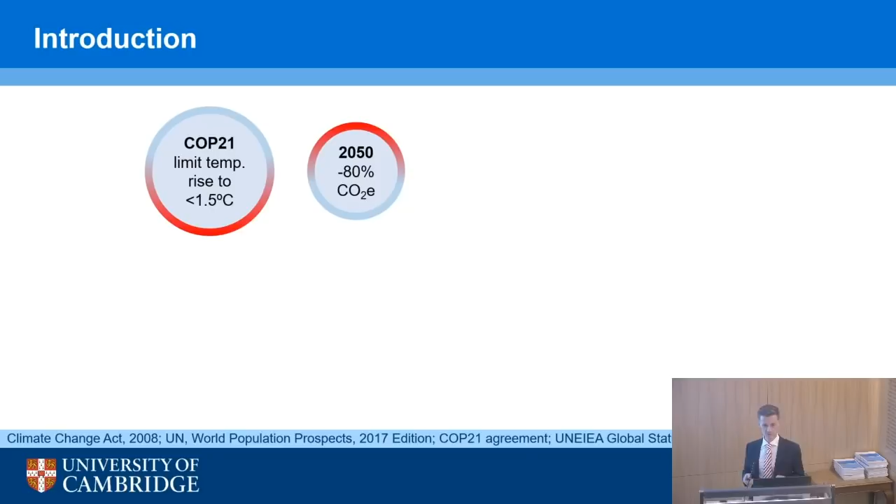So the context of the project then really goes right back to climate change and looking at things like COP21. COP21 sets out this ambition for a 1.5 degrees centigrade limit on temperature rise. And in the UK, that manifests itself as an 80% reduction in CO2 emissions. So that's just for the UK. Obviously important around the world. Global population is going to be 9, 10, 11 billion people by 2050. Most of those people, 68%, will be living in urban areas, so we have hugely increasing urbanization. And that's really important for the work that we do as structural engineers, because about 40% of energy-related CO2 emissions come from buildings and from construction.

So it's important environmentally. The sector is also very important for the economy. So 10 trillion, that number is. $10 trillion is the global construction sector, roughly. So it's about 13% of global GDP. And in the UK, the figures are slightly different. So it's 8% of UK GDP, roughly speaking, 10% of jobs in the construction sector. So it's really an important part of our economy, important part of our environment, and the things that we do underpin other sectors which make the workers have places to go, modes of transport, all of those things are really fundamental.

So despite that importance, when we talk about the economics of the industry, you might not have seen this slide before, but you'll have seen something like it. This is productivity, value added per worker. In the period from 1995 to 2011, data from 7 countries there, construction productivity flatlining, while manufacturing nearly doubles, so 1.7 times. So we have a huge challenge there in dealing with that productivity, whilst also satisfying the economic and the environmental constraints.

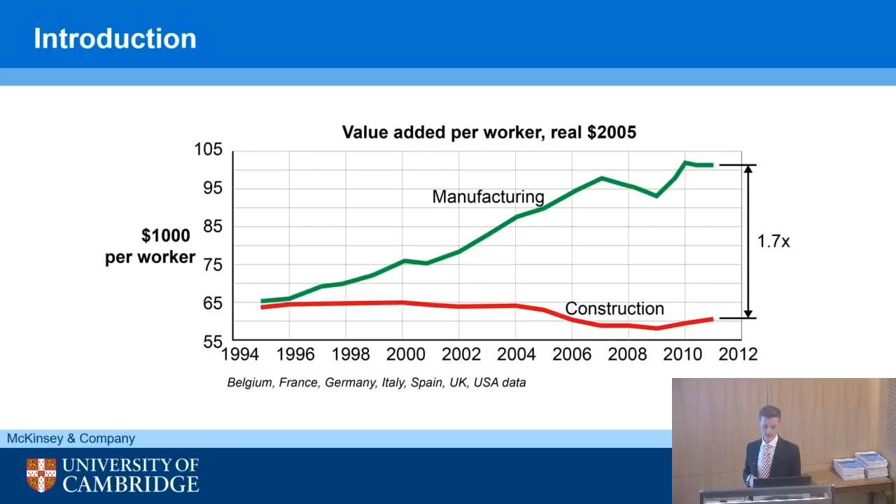In that same period, if we were to look at energy use in the buildings that we create, the energy demand balance has really changed. So there's been huge changes. So maybe 30 years ago, if you were to analyze whole life energy use, a significant proportion of it would have come from operational energy. So the lighting, the heating, running the computers and so on.

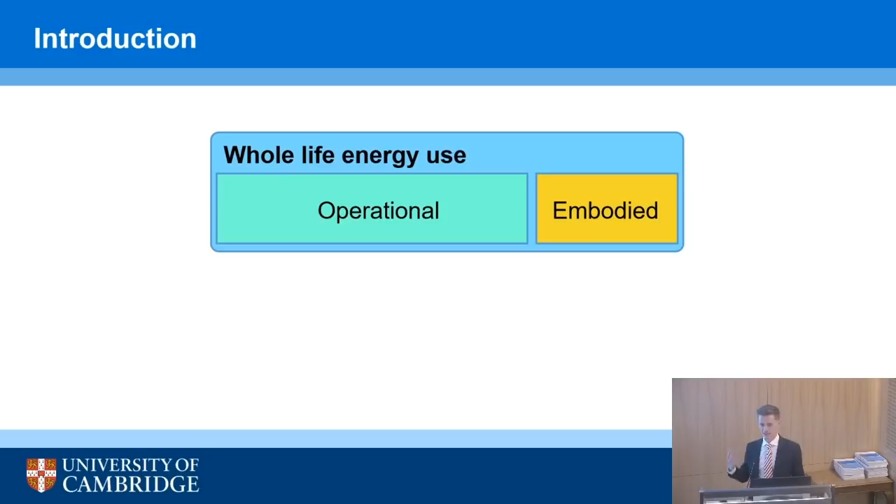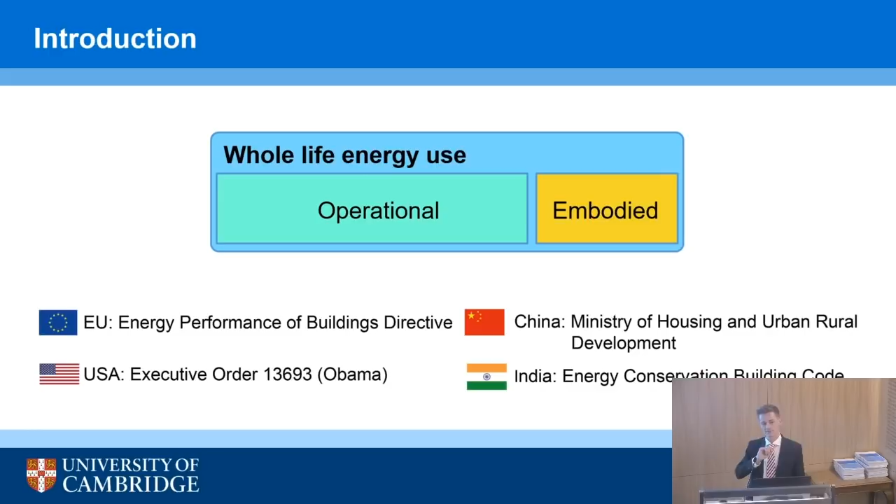We've decarbonized the energy supply, we've got better insulation, we've got better energy efficiency in appliances, and we've had a huge number of directives and requirements in energy performance, such that the pendulum, if you like, has kind of swung the other way, and you can now have buildings with very, very low operational energy, almost zero. Not quite zero, but almost zero. So it's swung the other way in a well-designed structure, which makes the embodied energy as a percentage the more important thing to consider.

Okay, so now we have to tackle embodied energy with the same vigor as we tackled the operational energy. This is an example from 2010, a 60-year life cycle of a structure in London, where 70% of that whole life energy comes from embodied energy. And it's the embodied energy that structural engineers get their hands on - the materials, the stuff that we have a real big impact on.

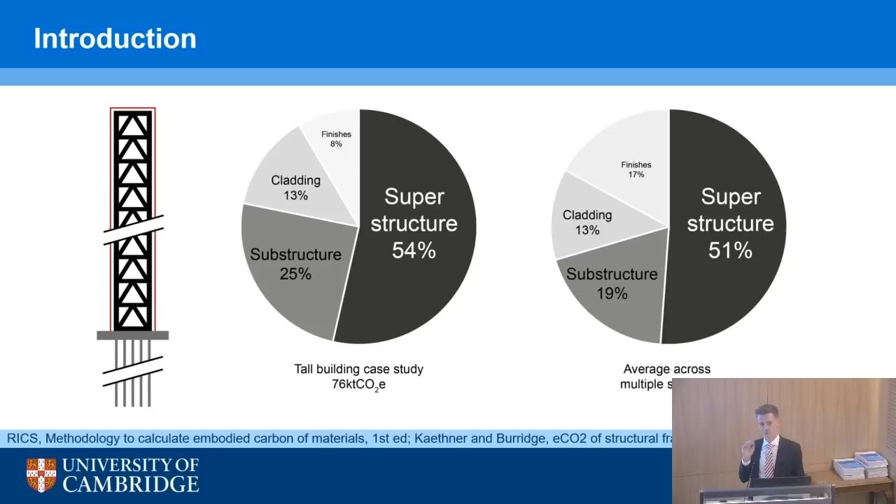As an example, this is a case study in London, a tall building - 79% of the initial embodied energy comes from the substructure and superstructure. Another study from Kaethner and Burridge found 70% of the initial embodied energy coming from the substructure and superstructure. So a large portion is in your gift as structural engineers.

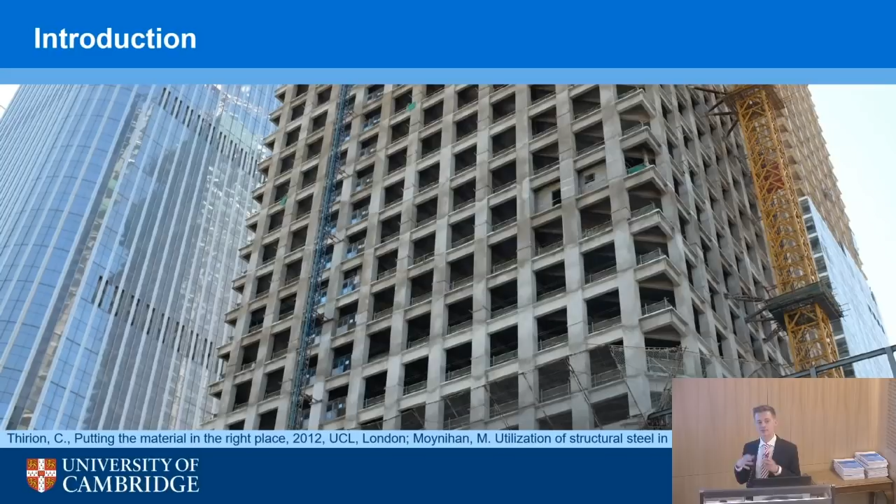So far, perhaps no problem. We need bridges, roads, infrastructure, offices, places to go, places to work - that's part of modern life. We want these tall buildings, and they require concrete or steel to put them up. One problem comes when we look at these structures and ask: how effectively, how efficiently are we utilizing the materials, how are we using this embodied energy? It has a big impact on the environment - are we actually making good use of it?

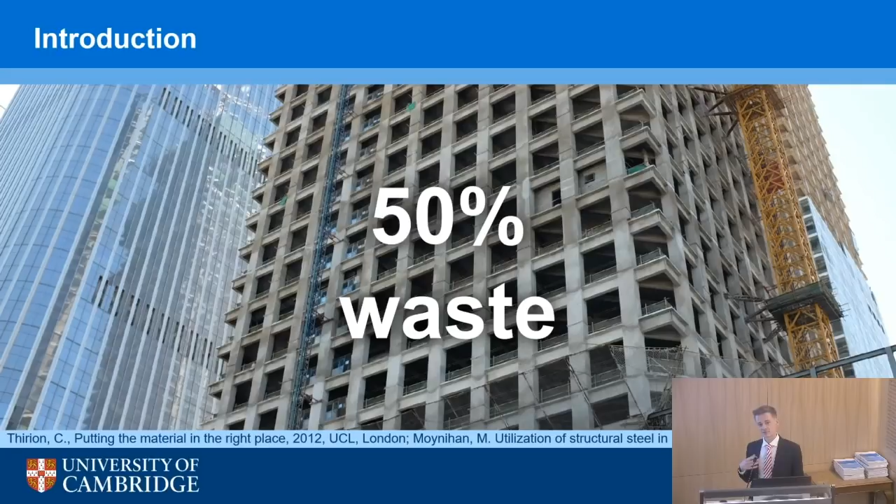You might find, from two studies, that 50% of that material is, in inverted commas, wasted. And that's a real concern.

It's a particularly big concern when we look at this report from the United Nations, where we expect to build, in the next 40 years, 230 billion square meters of new floor space. So huge amounts of construction - that won't be happening in the UK, that will be happening in other countries. That's like building Paris every week for the next 40 years. So this is the kind of scale of the challenge.

All of those data and statistics add up as a combination which you could either say is a perfect storm or a huge opportunity to do something really amazing with the materials that we have. And a final point about other countries: of that 230 billion square meters, 100 billion square meters will be built in countries without any mandatory building energy codes. So for us and for the institution, there's an opportunity to show leadership in how this could be done to the best effect.

Which leads us to this project: Minimising Energy in Construction, funded by the EPSRC, to whom we're enormously grateful. It's a relatively short project, only 2 years, intended to be a feasibility study. That's the whole point - it's the beginnings of, hopefully, millions of pounds, not hundreds of thousands. Our long-term vision is to make this idea of whole-life energy consumption using minimum material resource the guiding principle for design. That's our long-term vision, maybe several decades away.

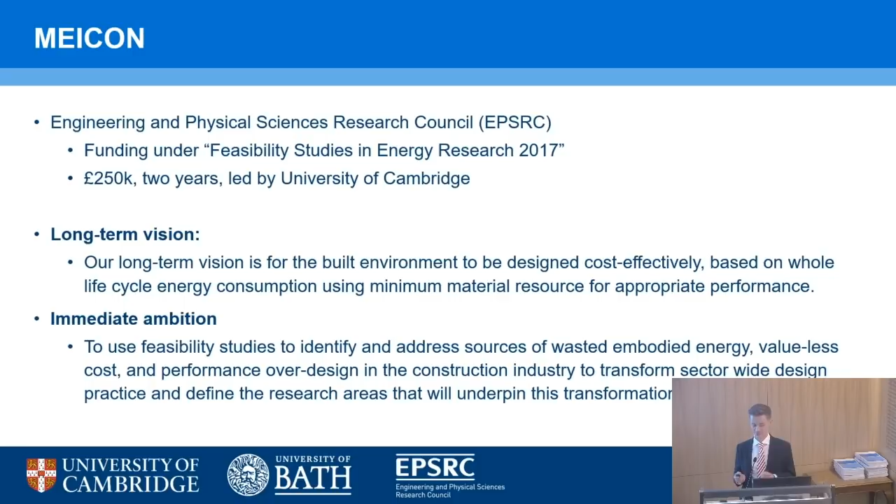The immediate ambition in the project is to use feasibility studies to identify and address these sources of what we're calling wasted embodied energy and value-less cost. That really fits in with two key documents. The first, from 2013, is Construction 2025, with 4 main targets, 2 of which are important for this presentation: to reduce costs by 33% and to reduce carbon dioxide emissions by 50% by 2025. The other 2 relate to speed of delivery and the trade gap.

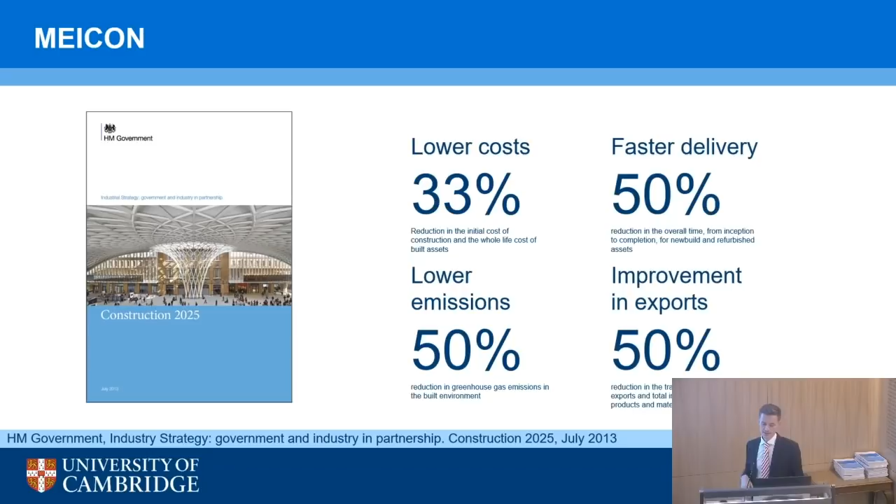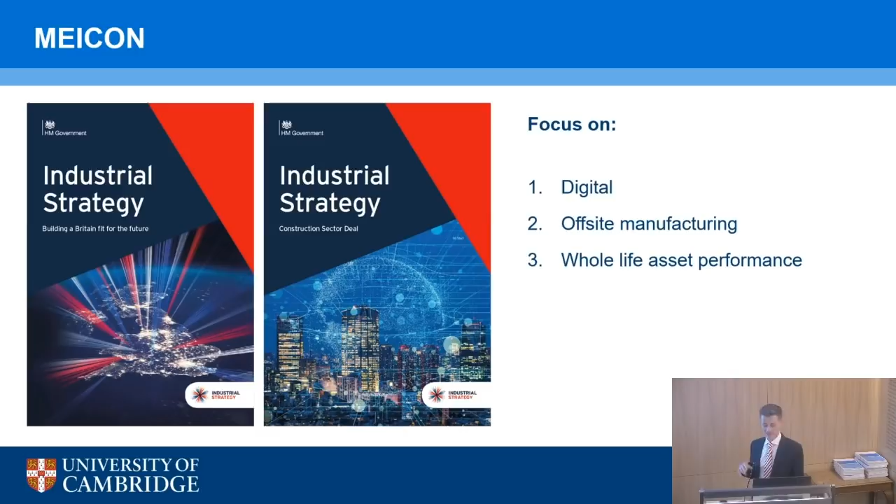That was 2013. Much more recently, we've had the sector deal for construction coming out of the industrial strategy, which talks about transforming construction for all the reasons I've just outlined, focusing on digital, off-site, and whole-life performance. These are really the key things that we and the government want to achieve, and there's £170 million in the Industrial Strategy Challenge Fund to deliver on those ambitions.

The project team is made up of myself, Mikhail and Jamie in Cambridge, and Alex, Stephen and Tim at the University of Bath. We're supported by a steering committee - I didn't count how many companies there are, but it's chaired by Expedition and Chris, who's going to speak in a little bit. We are always open to new discussions and collaborations - if this is interesting to you, just let us know, either email me or go to the MEICON website. We want to engage with as many people as possible to try and make a positive change.

So, as I say, I'm going to talk to you about the initial things that we've already done. We did a survey last year, 2017.

The purpose of the survey was to examine the current culture and practice in structural engineering design as it relates to embodied energy. It ran for a number of months, 36 questions, completely anonymous, although people could leave their names if they wished.

There were 7 sets of questions, various areas that we wanted to look at. We're not going to go through them all tonight.

There were 129 submissions in that period, August to October, and that's a significant enough population to make us quite confident in these results. We can do analysis on the numbers of people, but with a 95% confidence, we have a margin of error of about 8%, which makes no assumptions about skew of responses.

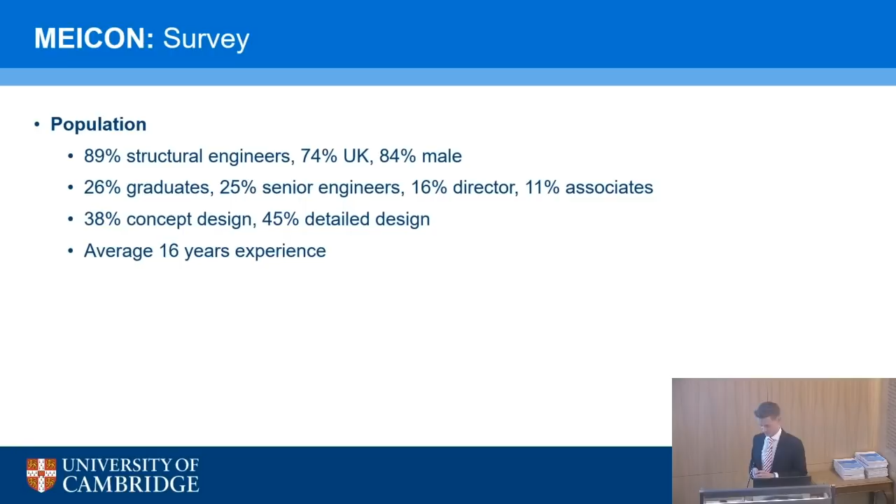So who answered the survey? The population, mostly structural engineers, mostly from the UK, mostly men, a wide range of job titles, wide range of experience. We compare in the report this population with the wider population of engineers in the UK, and it's a good sort of subset of people, so we can treat the results with quite a lot of seriousness.

So I want to jump straight into the questions. For those who didn't do the survey, I'm going to explain what we're going to see. This is question number 1. It's a Likert scale question, meaning you're given a statement and you choose between strongly disagree and strongly agree, 1 to 7. It's going to come up in a second, and I'm going to plot the responses here.

We asked the respondents, maximizing material utilization is a key design criterion for me. 81% on the 5, 6, and 7 - agree, medium agree, and strongly agree - which is very positive. 12% neutral, not many people saying strongly disagree. So that's what you're going to see, a few of these plots: 1, 2, 3 on the negative side, and 5, 6, 7 on the positive.

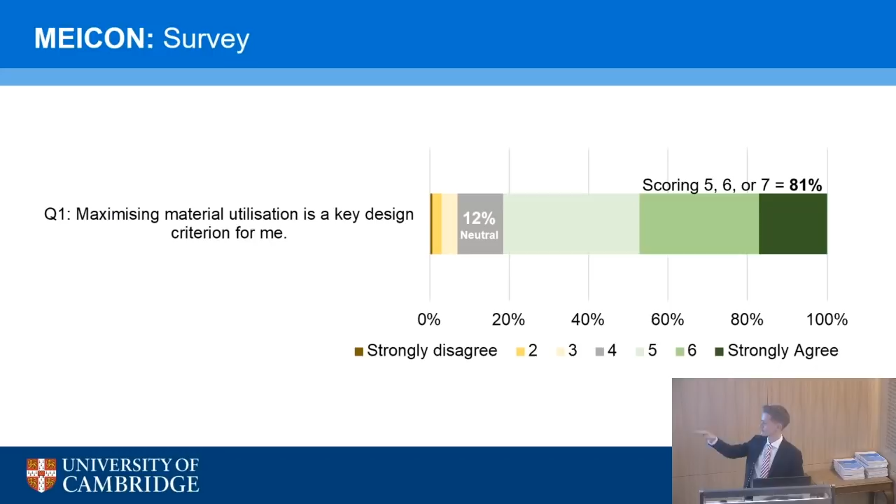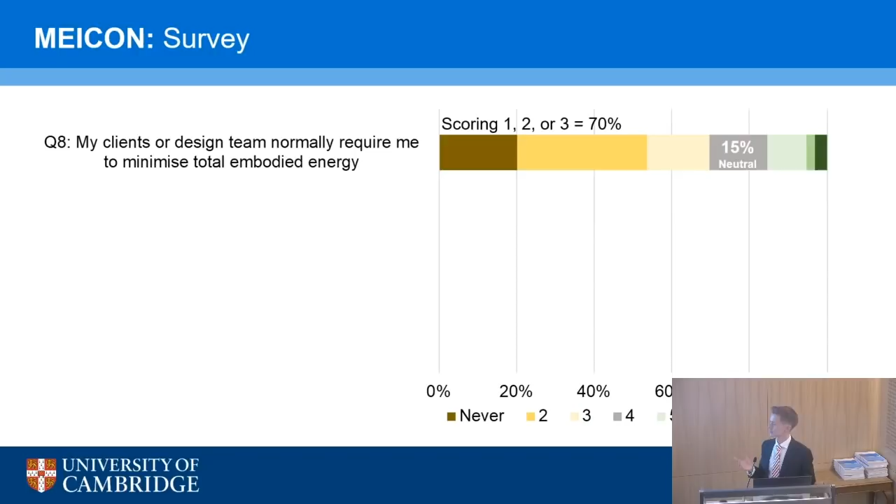But then we looked at the drivers behind why we see wastage in real projects. Questions 8, 9, and 11 looked at those drivers. Question 8 asked, does your client or your design team require you to minimize embodied energy? Now we have a scale of never to always, and we see it's on the other side - 70% of people saying not usually, or never, am I required to minimize embodied energy.

One of those other pressures which we've extracted from the survey could be the construction site. In question 4, we asked, do you agree or disagree with the statement that an easily constructed structure is more valued than a materially efficient one? And 80% of people agree.

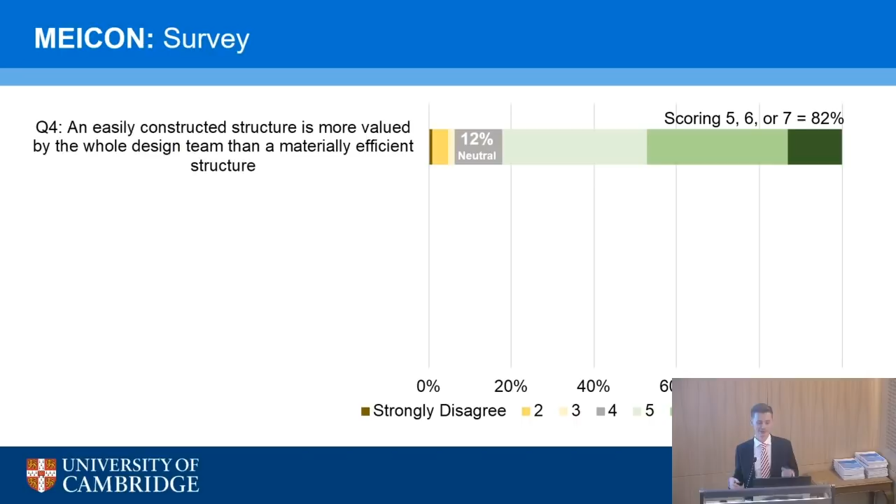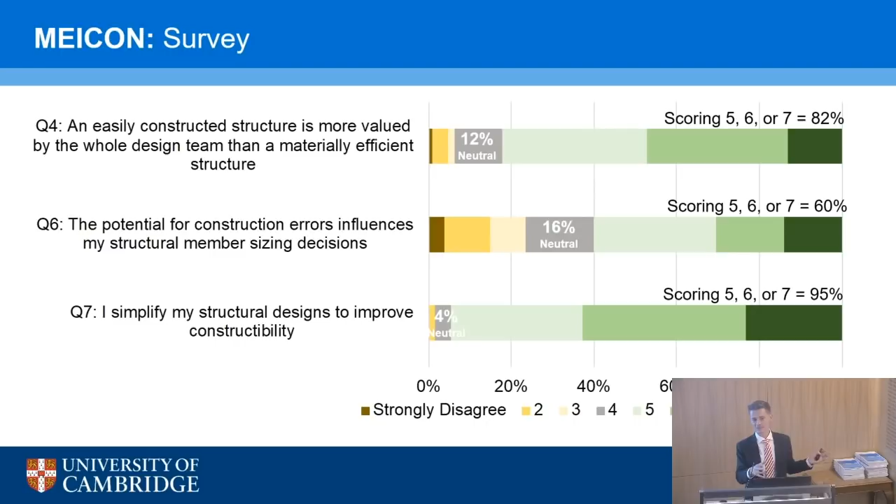Part of transforming construction could be, I would put it as a question, could be that we shouldn't need to simplify, that mass customization, which is done in the manufacture of shoes and cars and aeroplanes, should be part of the construction sector. And the Transforming Construction initiatives are trying to bring in the automation that we have in other sectors into construction. Construction is still very far away from this being how you build a building, very far away.

But there's a question as to why is that? What is the key driver for that? And there are research projects in the automation, in the robotics, which are going on at the moment. And so, as I say, in this report, we highlight a whole load of questions. I think there's 36 questions, and I'm not going to go through them all.

But that initial bit led to a key question, research question 1, which is saying, how do we align the incentives of all those various people, clients, engineers, architects, legislators, contractors, so that the preferred outcome of every project, not just one project out of 100, but every project, is minimum embodied energy or minimum environmental impact.

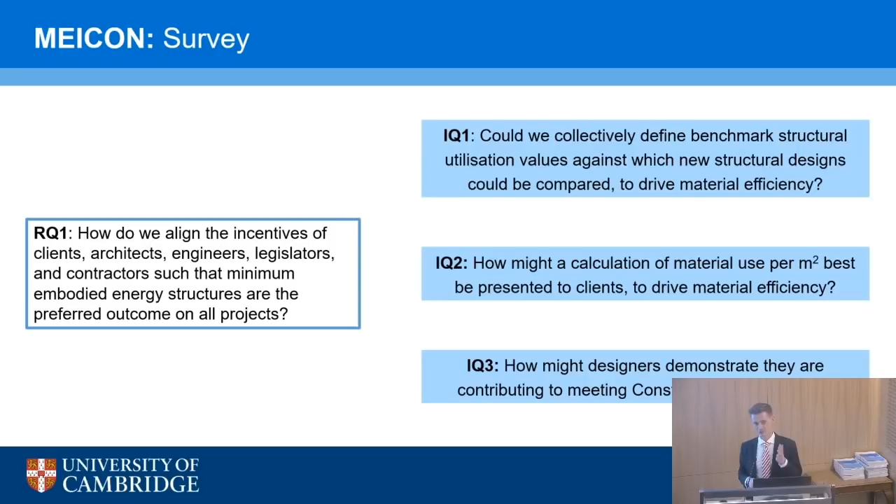And there's some associated questions about, can we define benchmark values of what should we be aiming for in embodied energy? Can we find a way to present this to clients so that they understand what we mean and what the importance of it is? And how do designers demonstrate, or how should they, or how could they, demonstrate they're meeting the Construction 2025 targets? So what are we doing to make sure that we show this?

And so in the context of benchmarking, on the left-hand side, you've got a picture which you might recognize when you buy a fridge or a washing machine. So this is actually for a building, which I have made. So you've got your energy rating, your embodied energy rating. You've got the size and the shape of the building, the location, what type, how many years you're considering. The A and B is kind of the scope of your assessment. And so perhaps we need some way of measuring this in a consistent way.

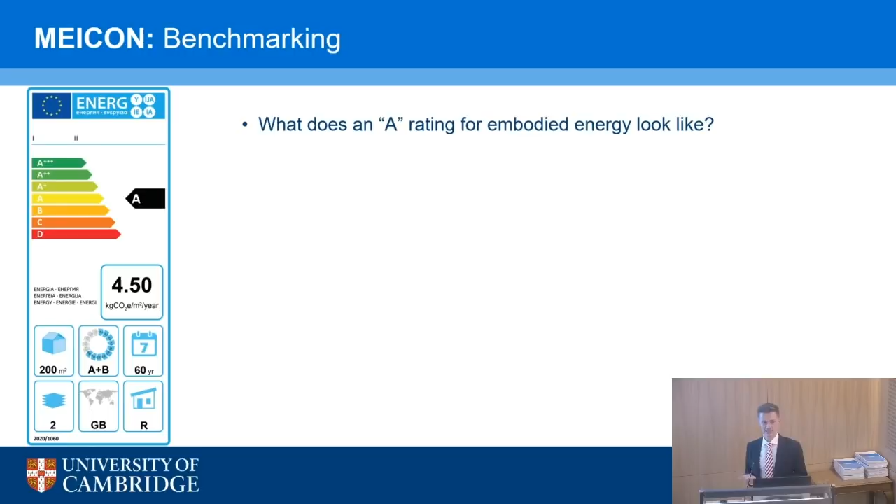There are tools which I'll talk about in a second. But then we raise all sorts of questions like, what is an A-rated embodied energy building? What does it look like? How do you present that information? Does anybody really know what kilograms carbon dioxide equivalent per meter squared means? People might understand pounds, but perhaps not other units.

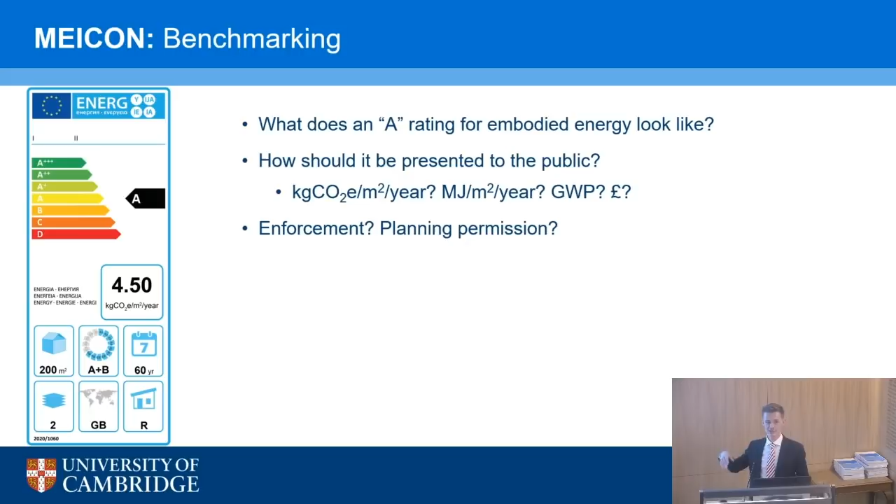And how do you enforce this? It's not as if people pay every year for their energy costs. The embodied energy is a thing which happens at the beginning, and the impact is much wider than one person. So perhaps planning permission is a way in which embodied energy can be minimized. And what are the boundaries to your measurement?

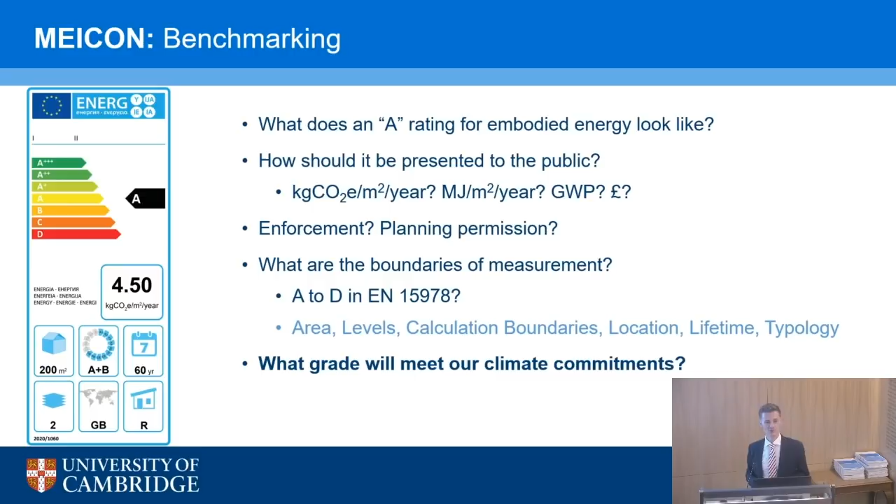I'm going to come to EN 15978 in a second, which you probably have seen, but there's a whole number of ways to skin the cat in measuring whole life carbon and whole life energy. And crucially, what number do we choose to meet those climate commitments? We could set a benchmark of 2,000 kilograms per square meter, and we would massively overshoot on 1.5 degrees centigrade. So this is a real challenge.

And there are a huge number of codes, tools, techniques, assessment methods for measuring carbon. EN 15978 is where this figure comes from, and you've got all the various stages of your building, A to D, and so in my diagram, that A plus B means we're considering production, construction, and use, but nothing else. So you draw your boundaries. This is starting to be picked up.

So if you're a member of RICS, then you may well have seen this document, the Whole Life Carbon Assessment. It's written by a group chaired by Simon Sturgis, really great document. And it's now mandatory for RICS members to undertake a whole life carbon assessment of the substructure and the superstructure across those 7 areas which are highlighted in red.

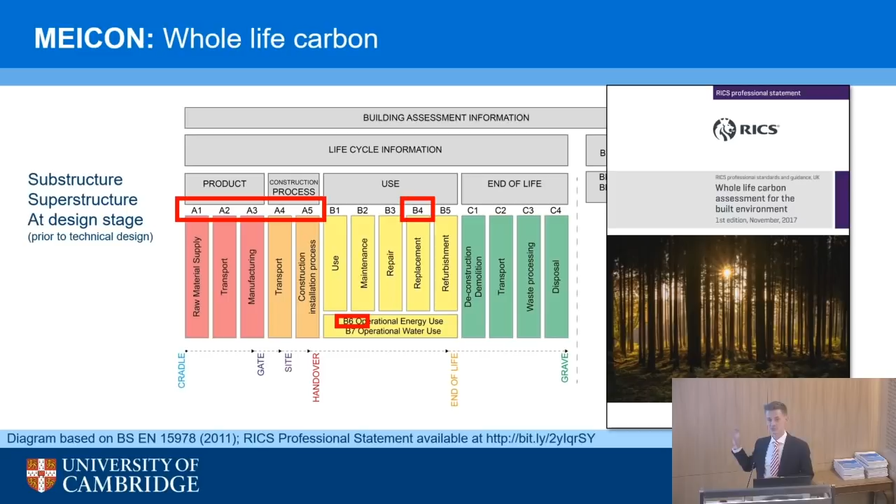So this is becoming a tool, and at the moment, this is a tool to count, effectively, to measure how much embodied carbon is in your structure. And people have done this, of course. So there are plenty of databases which exist. This is one from 2017, Simonen, I think it's Washington University.

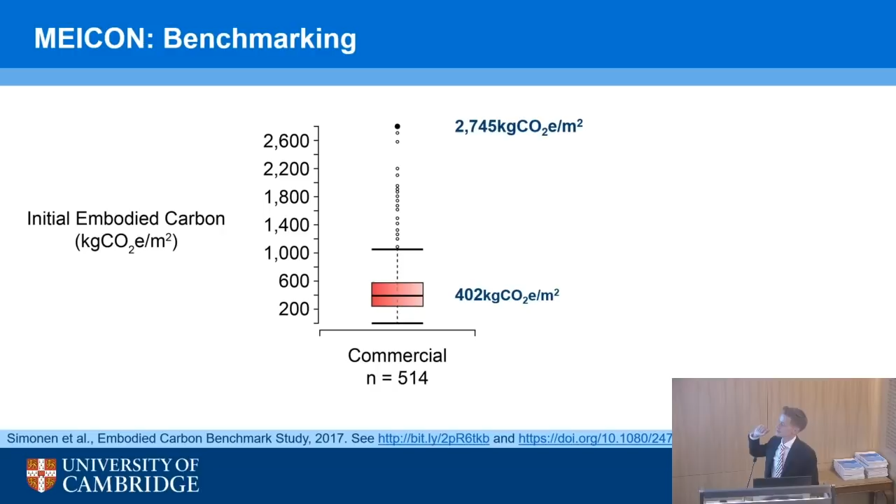So you've got 514 commercial offices, and we're plotting the median as 400 kilograms per square meter. But there's one out there, 2,700, which is an outlier, we will say. And this kind of highlights limitations in these methods, that the data inside these 514 have been generated in a whole variety of different analysis methods. And so how do you compare them? So 2,700 might actually be a better, in inverted commas, building than the 400. How do we know what to do with that?

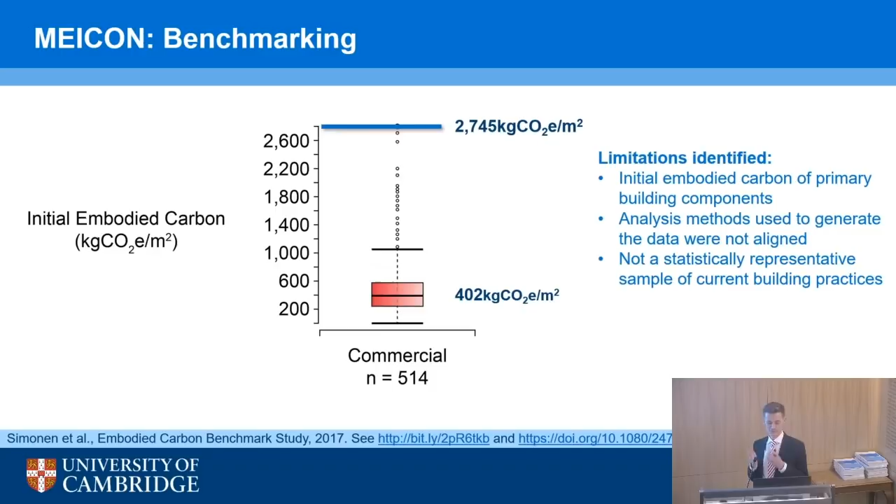And then crucially, as I said, in benchmarking, where do we draw the line? What is our target? Is the target 2,700 or is the target 10? And what should we be aiming for in terms of a pathway to minimum embodied energy? So that's the question about improvement. How do we actually improve? So the first thing is to measure, to find out what we're doing, but measure in a consistent and comparable way, and then somehow set benchmarks. And who sets the benchmarks? What is the benchmark targeting? And as I said, that could be potentially planning or legislation.

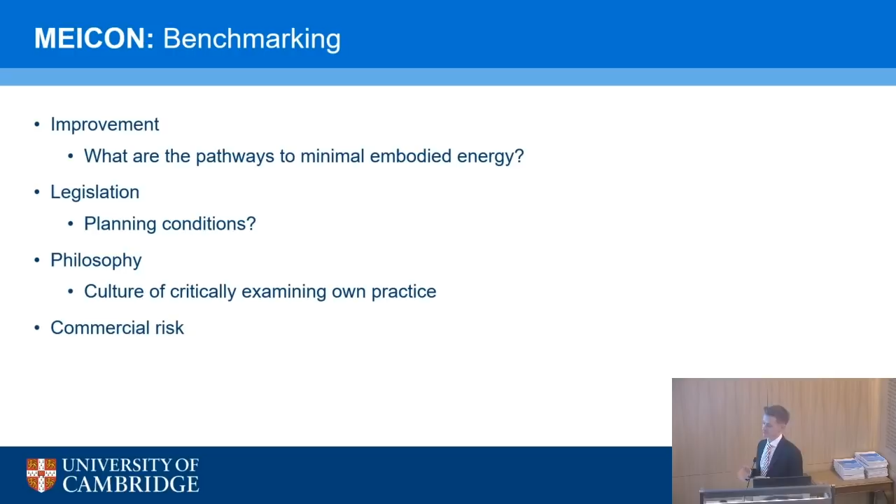And it possibly involves a change in design philosophy and culture, in that we have to critically examine design and say, okay, we've done this, but we can do X, Y, Z things better, and be willing to tell clients, the public, what you're going to do, what you're going to change, which might entail some commercial risk for companies of being open about the data that we collect.

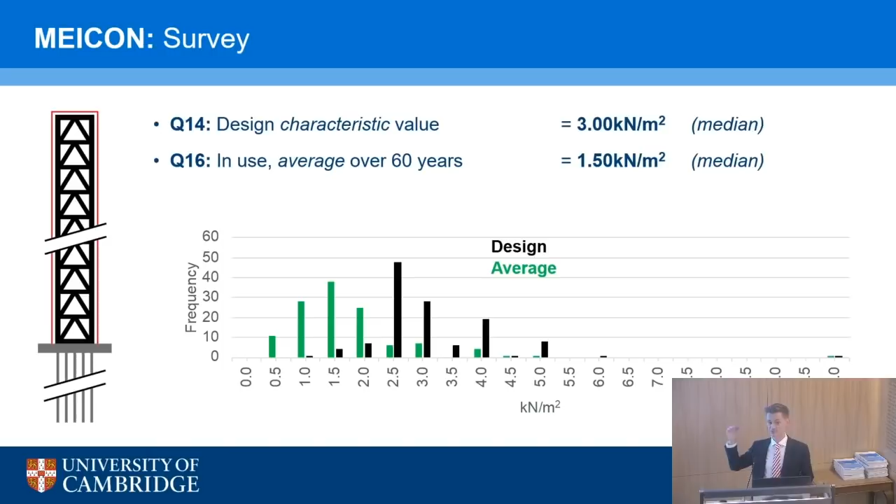And so in the survey then, in this loading context, we asked them to imagine you're designing a tall building, repetition of floor plates, so 50 stories. And we asked 3 questions just to get a feel for where we are. So we asked, what would you use as a design characteristic load? And the median value was 3, but it was a range from 1 to 10, so that's interesting. The average in-use floor loading, so average in use over 60 years, 1.5. So remember, characteristic is a statistically extreme value, and average in use is the average value. And then we said, well, what would the maximum be over 60 years? And that came out as 2.5.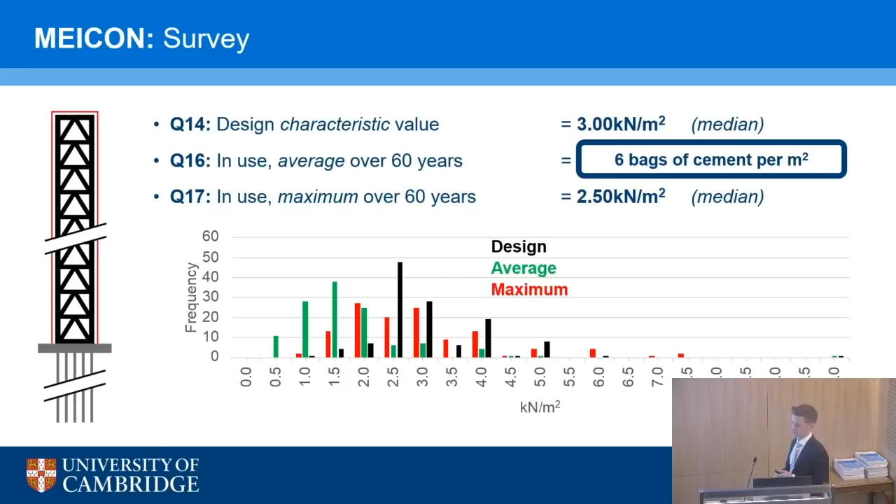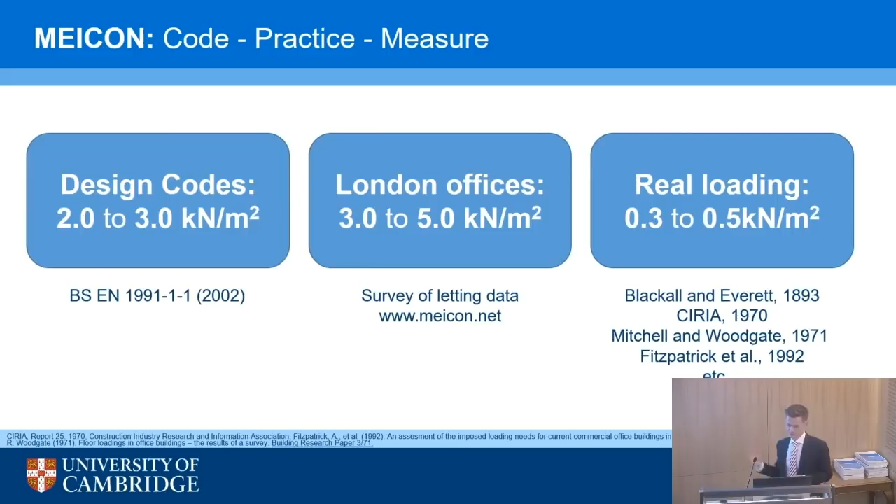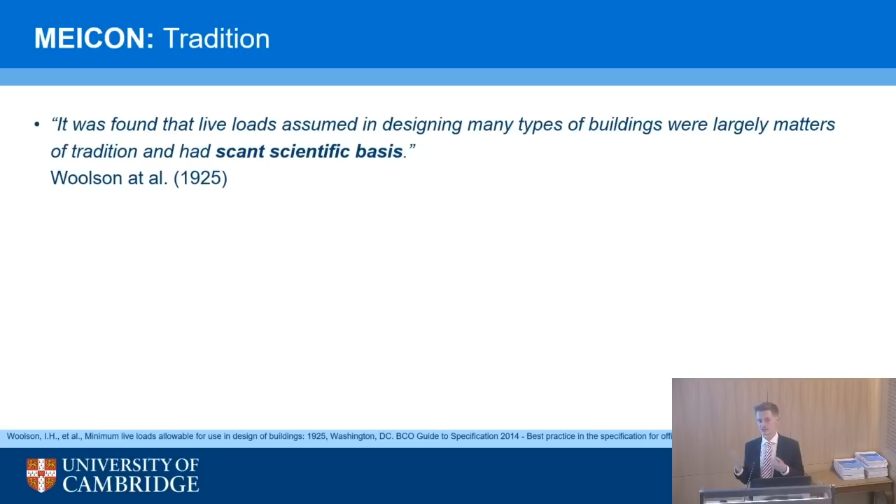And we've known that really since 1893, so that was the first one that MEICON did a really good survey of where these data come from, and 1893 was the first. And then the Stanhope was Fitzpatrick, and Mitchell and Woodgate, the BRE. So there's this kind of disconnect. And back in 1925, this author was saying that, we've looked at live loads, and there's no real basis for it. It's tradition, effectively. There's no scientific basis for it. And skipping forwards to 2014, the BCO Guide to Specification, I think I can quote from this, says, buildings designed for far higher than regulations require, based on a perception in a marketplace.

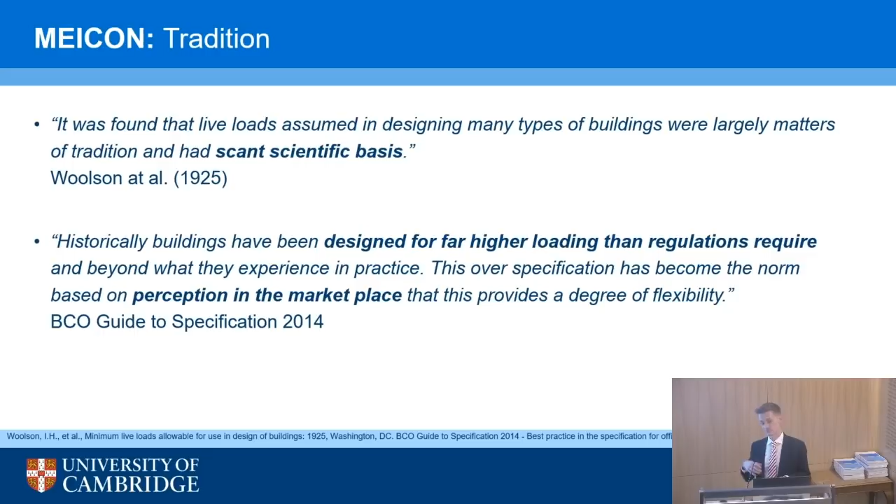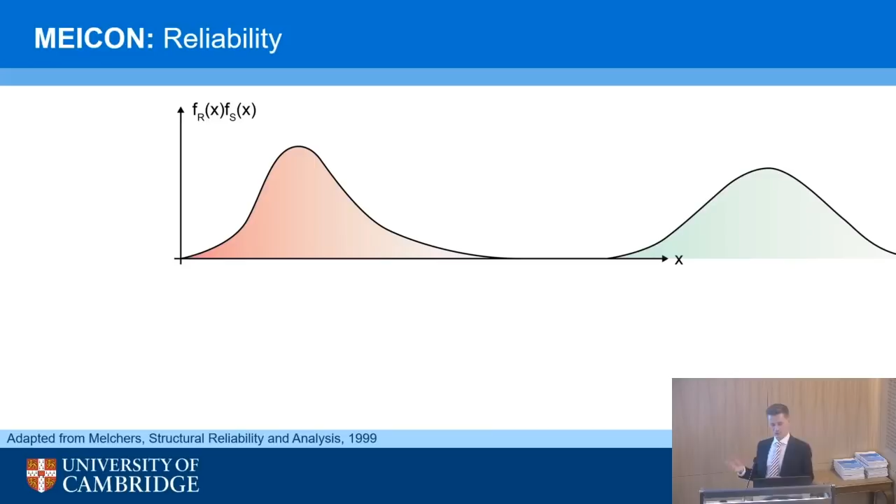And so that idea about tradition, historic practice, is in the Eurocodes. So I'm just going to put a piece up from the Eurocodes talking about psi factors and partial safety factors, the basis for which is the calibration against a long experience of building tradition. That's where they come from. They don't come from a statistical thing. They're the calibration of a long experience of building tradition, and as it says, that's the leading principle for most

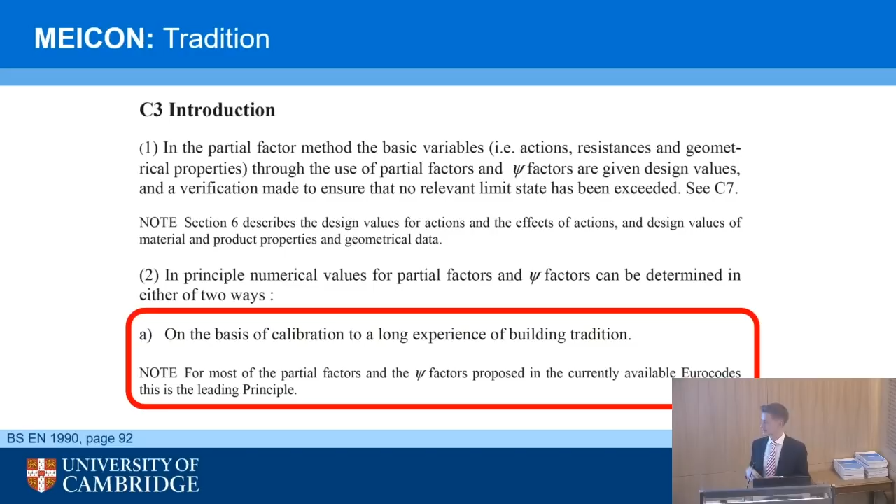of those factors. And because we're always calibrating against historic practice, it contributes to what we call perhaps a one-way ratchet in codes, in that it's very difficult to go the other way, to start to reduce things, because we don't measure, we don't have enough data to support those decisions. And so we are kind of trapped almost.

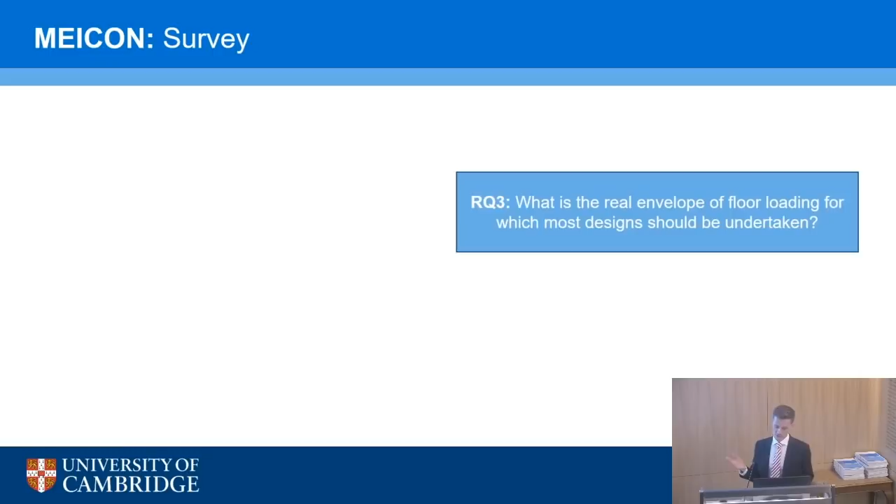And that led to a series of questions about what should the envelope of floor loading be, what would the benefits and consequences be. We have to be very conscious of the potential for unintended consequences of changing these numbers. That's really important, but based on measured data. So when we start to measure things, can we actually inform practice to improve practice?

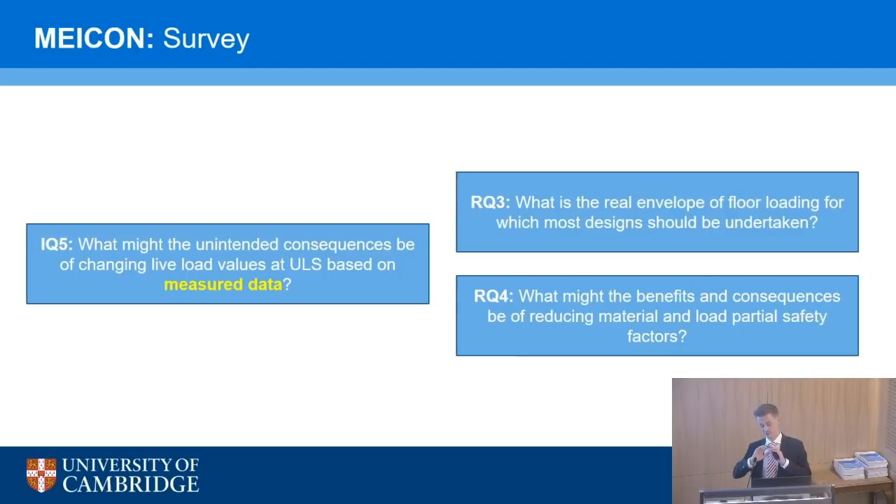And I'm going to take a slight deviation. People have been measuring buildings for a long time. In fact, the Baker building where I work was built as one of the early plastic steel frames with strain gauges installed on it. But I don't know if they were ever connected to anything. I'll have to find out.

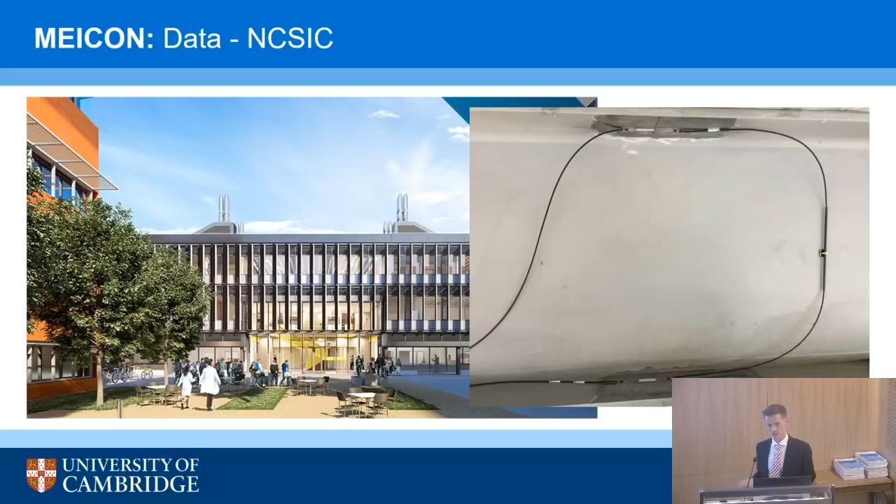This is the new building in Cambridge. It's part of the UKCRIC funding from the government, and it's the National Centre for Smart Infrastructure and Construction. There's about £500,000 worth of sensors in there, not just strain gauges. What they look like in reality is things stuck onto steel beams. That's literally what we do. We're going to stick them on, and we're going to measure the performance of the structure and interpret this in some way. I asked one of my colleagues for a plot.

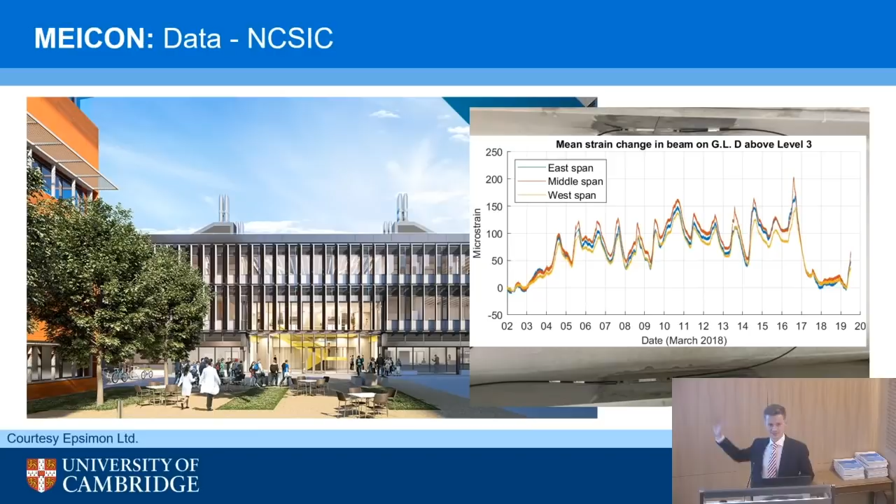So this was in March. This is the kind of thing you get. You get a plot of the change in strain, so you get some data out of it. The lines don't matter. The important thing is, if we're going to say we want to interpret something from the built environment based on data, based on measurement, to increase certainty, then we're dealing with lots of information potentially. And the difficulty then is, how do you get this bit, the red dot, how do you get the insight out of all the noise of strain gauges in beams or vibrations in floors?

And how does that inform practice? It's very, very hard to see how you pick those things out. Otherwise, we end up with a measurement system which plows out loads of graphs, but does that impact your design practice? What would you need to see? And the more things that you measure, the more correlations you can make.

So there's a website called spuriouscorrelations.com. So we can correlate with 95% certainty United States civil engineering doctorates between 2000 and 2009 with per capita consumption of mozzarella cheese. So they are identical. 95% correlation absolutely means nothing. So it's easy to do this if we collect lots of data. So we want to introduce certainty, but we have to be aware of the limitations of doing that.

And so the question might be how best we do that for bridges, for floors, for office buildings, for ultimate limit states, and for serviceability limit states. That's a real sort of challenging question to deal with. And so the final part of my section is to talk about serviceability. And we asked in question 20, how often does SLS govern your design? So how often are you governed by SLS?

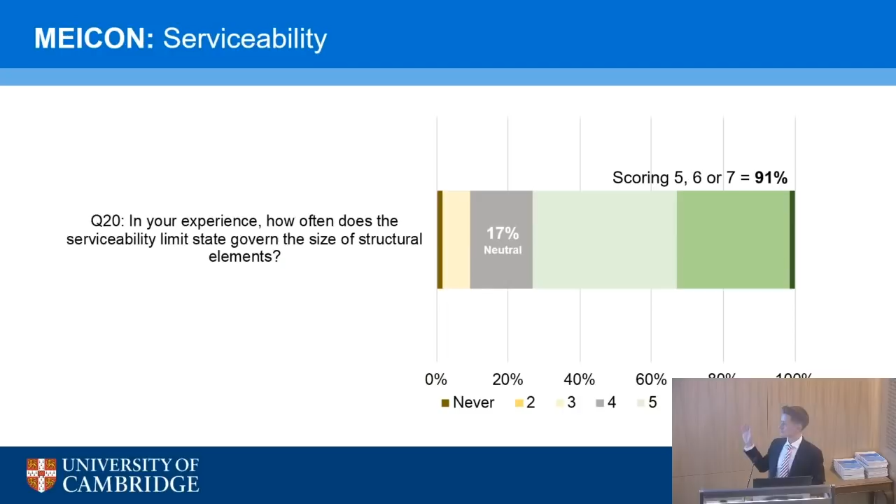And again, going back to our Likert plots, we have 91% of respondents saying that's how often. 91%, it's more often than not that SLS is governing the design. Question 22, so only 2 questions later, said, how frequently would you be comfortable with these SLS limits being exceeded? So again, we're talking about an office floor, and we divided it up into various categories.

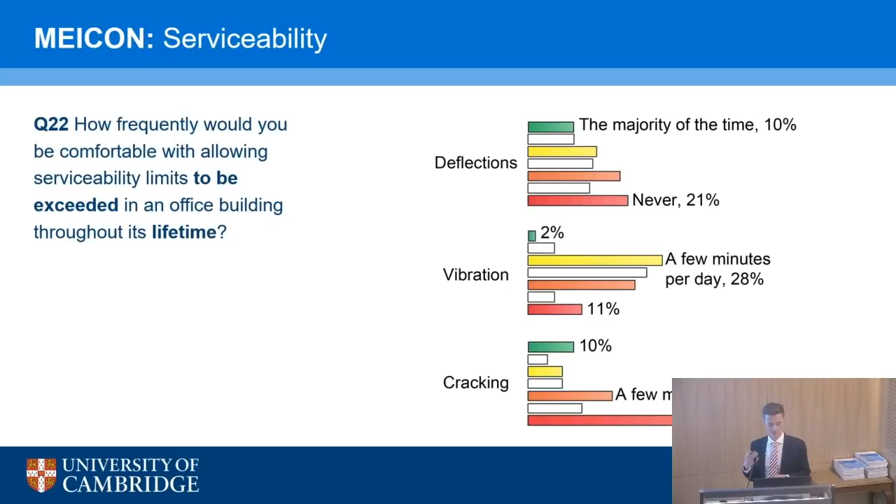So for deflections, people were happy with deflection limits being exceeded the majority of the time, 10% of people, 20% said never. For vibration, only 2% said that could be exceeded the majority of the time, 30% said a few minutes per day, 10% said never. And for cracking, so we're talking about concrete, 10% said the majority of the time, but 40% said never. So this is kind of interesting in itself, that a large number of respondents in the population are happy for SLS to be exceeded occasionally, which is intriguing if that's what's governing your material use.

To illustrate why that's important, this is a figure from Cyrille Dunant in Cambridge. What you're looking at is 3,600 beams in real buildings. We have the utilization ratio of each member on the x-axis, and the mass fraction on the vertical axis.

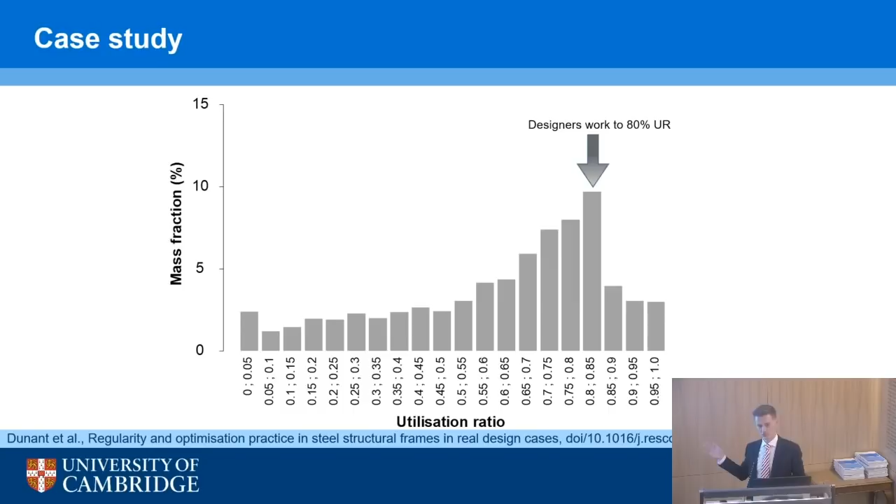The first thing we can note is there's a peak around 80%, so people are working to utilizations of around 0.8, and then the obvious question is you're missing out on 20%. Why not work at 1?

The other interesting thing is when we look at what's in these grey bars, it's the governing criteria. So 60% of those beams, that sample of 3,600 or so, are governed by SLS, but we're happy for that to be exceeded. So how is that? Is that something we are actually happy with as a set of designers?

Would we instead want that plot to look more like that, where most of the mass is being used at a high utilization ratio, and in that plot you've not changed anything about the design codes. They have stayed completely identical to how they are today. But instead of being governed by SLS and having a utilization of 0.8, everything's up at 0.9 and 0.95.

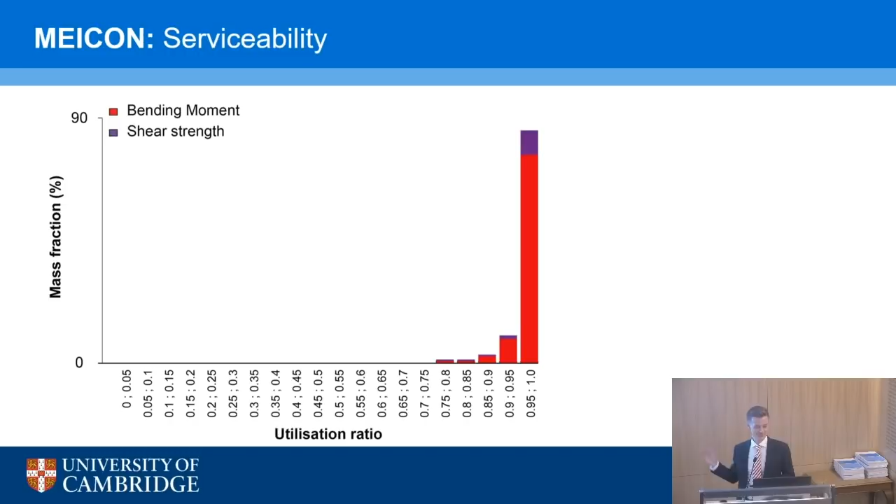And 1. Now, that's possibly impossible. I don't know, I just drew this on my computer. We can draw anything on a computer. So this is a question.

The question might be, what does that mean in energy, in weight, in cost, in construction? What does a building that has that result actually look like?

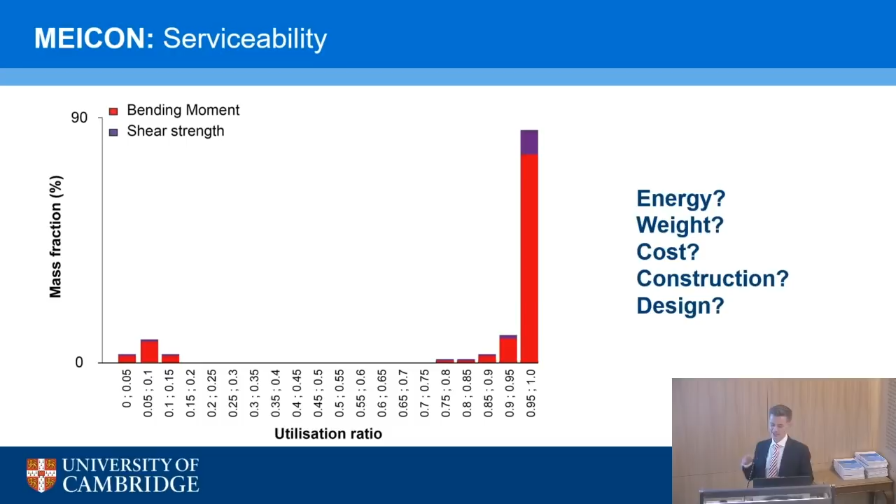It's very likely that you do need a percent of mass down at these low utilizations for those extra bits of steel that don't really do much, like the trimmer beams and so on. That might be 6% of the mass of the building. But why not make the bulk of it shift towards the right?

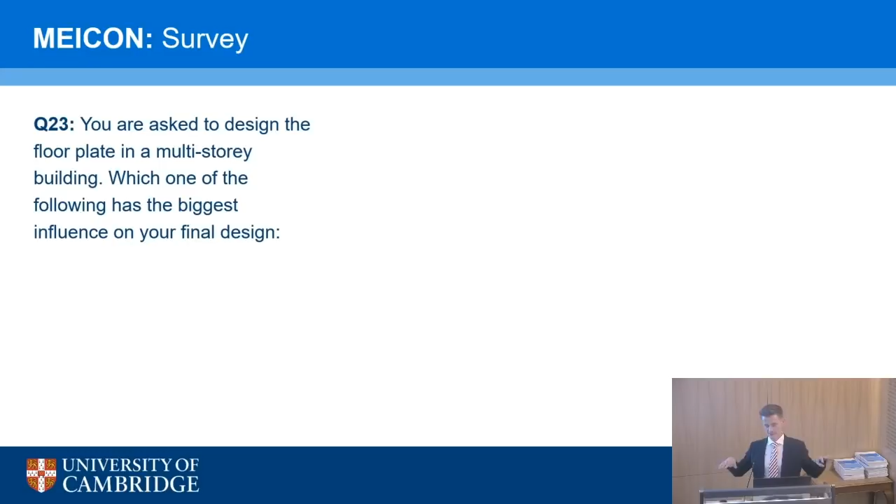And then finally, we asked people: you're designing this multi-story building floor plate, what's the biggest influence on your design? What really concerns you? So construction ease, as we said before, we've seen that already, that's important.

30% saying construction ease. Cost to client, 54%, so people are governed by that cost to the client. There were 2 others, and then material consumption, 20%. So only 1 in 5 saying that's really the biggest influence.

It's the cost to the client which people are worried about, and that's absolutely understandable. It's easy for me to stand here as an academic without a business to run and say, why aren't we thinking about the planet? But why aren't we thinking about the planet?

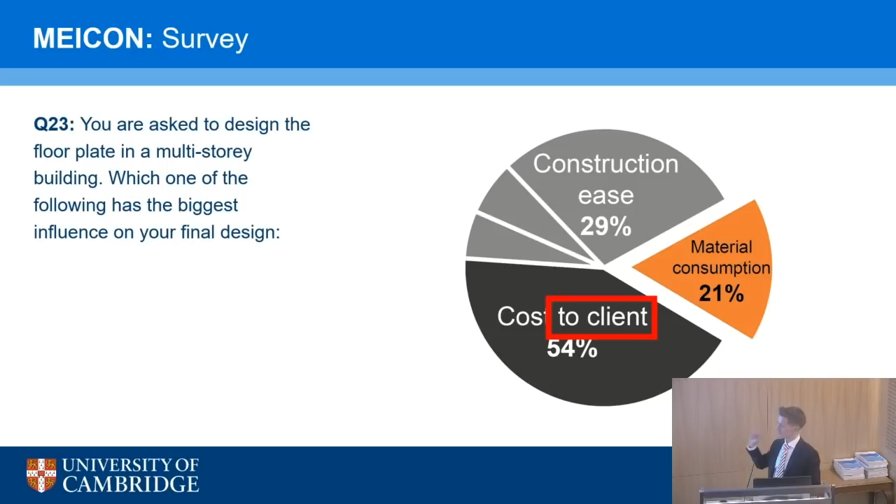Because if the cost to client is governing, and that means you're using twice as many cement trucks, then the cost to the planet is pollution from diesel trucks, cyclists getting hit by these diesel trucks driving around London. So the indirect influences of your design can be very significant, and thinking about that in the round is really important.

That brings us back to the Construction 2025 targets, where remember it's 33% less initial cost, which perhaps your client is worried about, but also whole life cost. And if somebody is not going to keep the building for very long, we have to consider the whole life cost in terms of money and also in terms of energy.

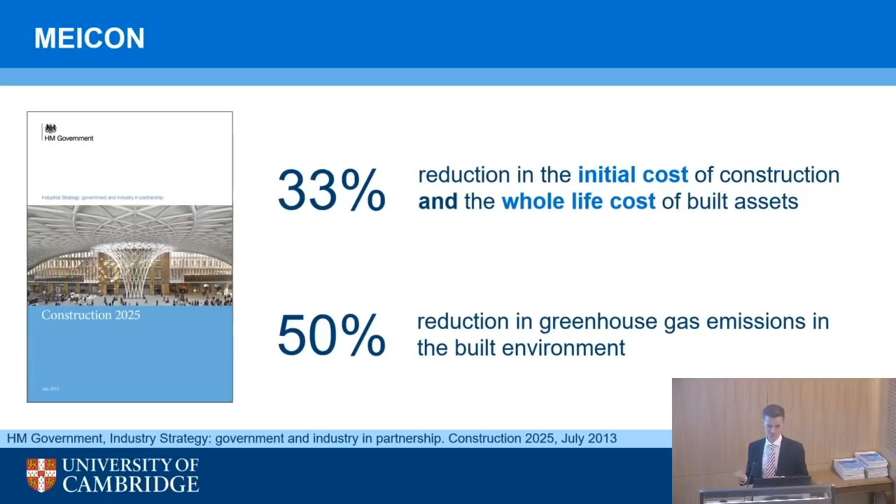I wonder if this is a challenge as significant as that one. I put this up because I had a chat with Chris, and there's a film out at the moment called First Man. In the 60s, JFK said, we choose to go to the moon, when there was no way of doing it. Actually, we can't go to the moon anymore, but we chose to do it.

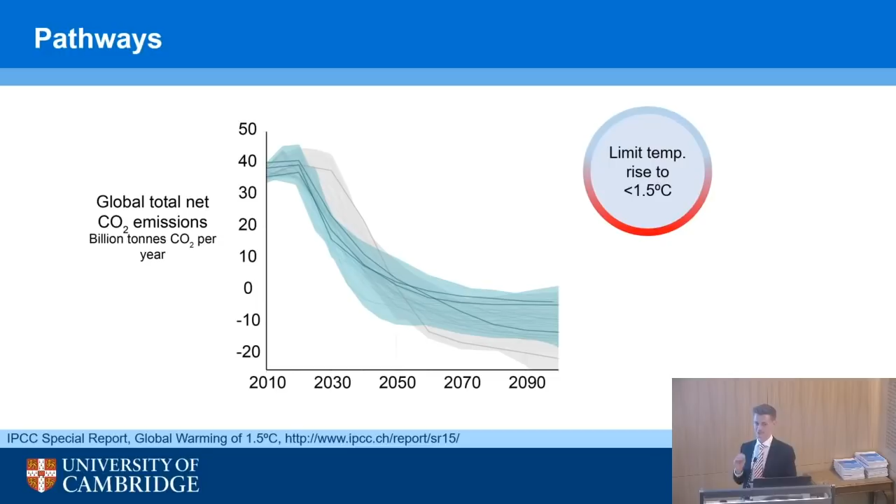So the question is, what do we choose to do? Do we choose to go to zero embodied energy, and how do we get there? Because that is the pathway to 1.5 degrees centigrade, and it takes us to zero CO2 emissions.

Our budget between now and 2050 is about 600 gigatons of carbon dioxide emissions for everything, not just construction, if we're going to get to this target of zero emissions per year by 2050, which is what the IPCC says. This isn't a made-up graph, absolutely not - this is a real graph from the IPCC report, very recently out. If you want to get to 1.5, it has to be drastic - that's a cliff edge drop.

So what does that mean in terms of our buildings? What do they look like? What changes, for the user, for the designer?

I was reminded of three principles which I think still stand, and I hope you agree they still stand, which you've hopefully read in this book. It's a fantastic book if you skip over the beginning few pages, where deference to Caesar isn't really relevant anymore. But Vitruvius is saying that all of these things we do must be built with due reference to durability, convenience, and beauty. I think that's a guiding principle we can all still agree with. And that's from 30 BC.

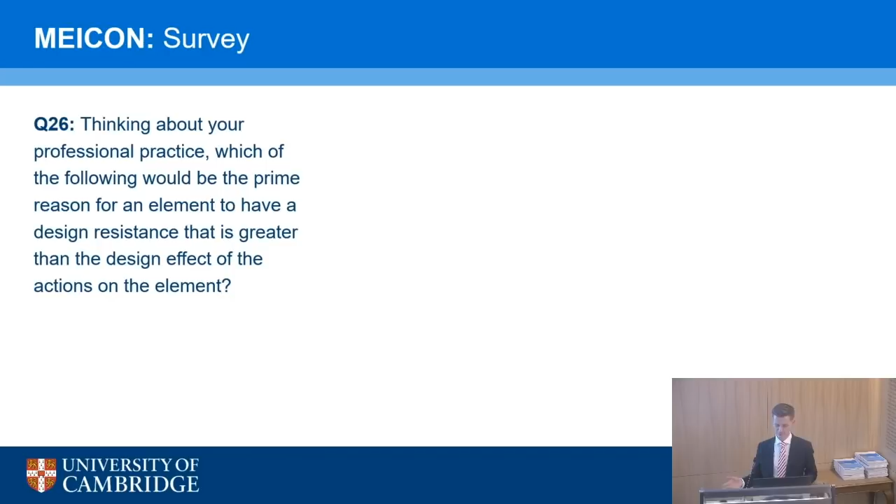So my last point, my last question, was number 26. We said, thinking about your professional practice, which of the following would be the prime reason for an element to have a design resistance greater than the design effect of the actions on the element? So what's the reason for not having a utilization of 1, effectively?

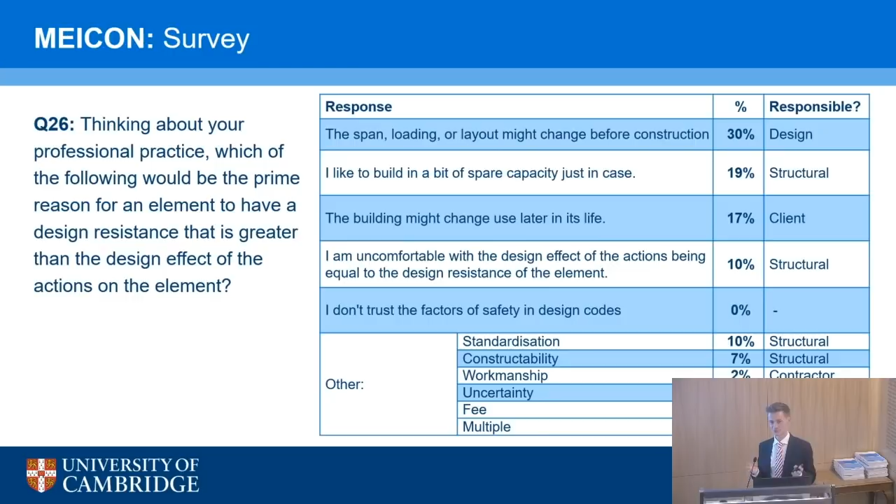Those answers can be categorized as we see on the screen, and I'm not going to read them out, but the important thing is who is responsible for each of those categories. We can say it's the design team, the structural engineer, the client, the contractor. If we add up the percentages, maybe 40% of that is in the hands of the structural engineer, making the choice about how much embodied energy we use.

On that note, I'll just reiterate that this is the beginning of a conversation and we want to hear your thoughts. Since we've arrived at design, I'm now going to pass over to Chris, who's our resident industrial designer.

Okay, thanks Chris. Great, very good. That's fantastic. Yes, so I'm chairing the Industrial Steering Committee for this project, but luckily it's steering itself.

So I took this book with one of my partners to a meeting with a developer about a week ago, and we did the normal show and tell, because we were trying to get them to give us a job. We said, these are all the fantastic projects we've worked on, and we'd really like to work on your project, and we think we're nice people, and you look quite nice as well, so why don't we work together? And that went down like a lead balloon. He said, I'm not really interested in that. Why should we employ you compared to all of your competitors? So I thought, okay, I'll try this tack.

So I got this book out, which is all of the questions from MEICON, and I said, have you ever seen anything like this? He said, what's that? I said, well, it's about how to minimize the amount of material you're going to put in your buildings. And he said, not really interested in that either. I said, well, so you're not interested in trying to reduce the amount of carbon? You're not? He said, no. Are you interested in trying to help reduce the effects of man-made actions on the climate? No, not interested. This chap was a former architect, which probably explains that.

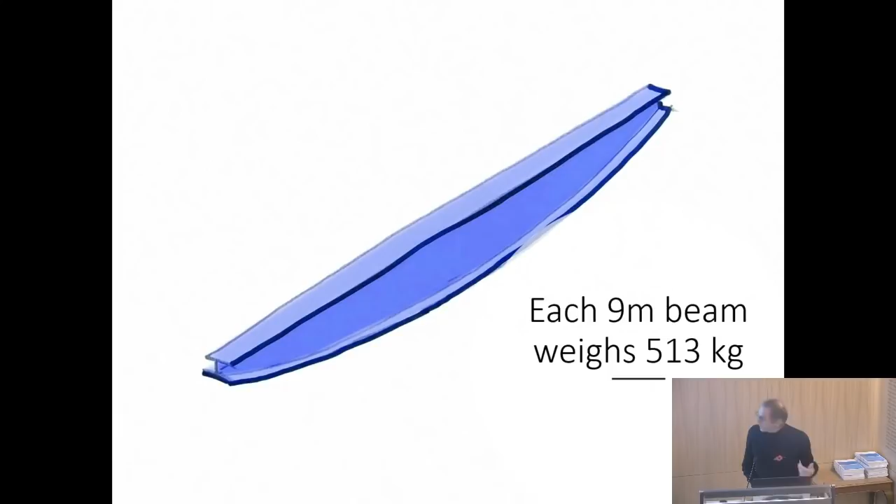We now have things like, if you do a perfect beam rather than a regular beam, you can save 30% of the material, that sort of stuff.

So basic, and it was usually done at that time, carbon was very fashionable to talk about carbon in the world. So everything was done on the basis of carbon reduction.

And so we did compare and contrast, have a look at stadia around the world, compare them. We did them on the basis of carbon, which we converted for the purposes of everybody's ease of understanding to the number of cups of tea you could brew using the energy that you would otherwise be spending on your building.

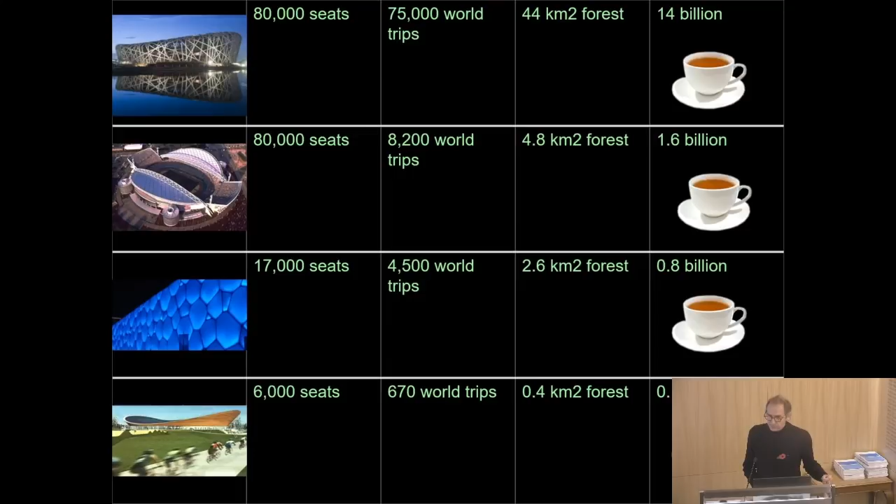So 14 billion cups of tea, to make the bird's nest, you can make 14 billion cups of tea with the energy you use to produce the steel for the bird's nest. And then we converted it into a sort of washing machine style energy rating for your project.

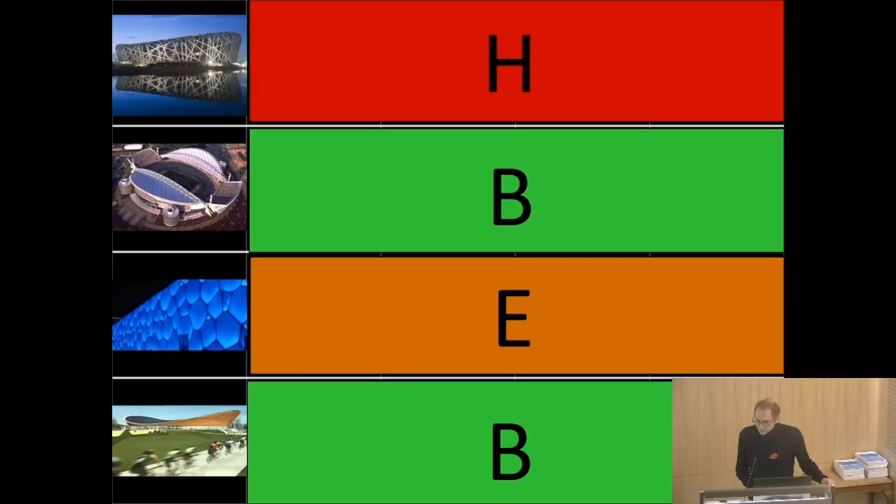So we had a velodrome because we were working on that at the time, which we gave ourselves a B for because we thought we could do better. But things like the aquatics at the Olympics were very, very inefficient. And we thought the bird's nest in China was particularly inefficient. That went down pretty badly as well.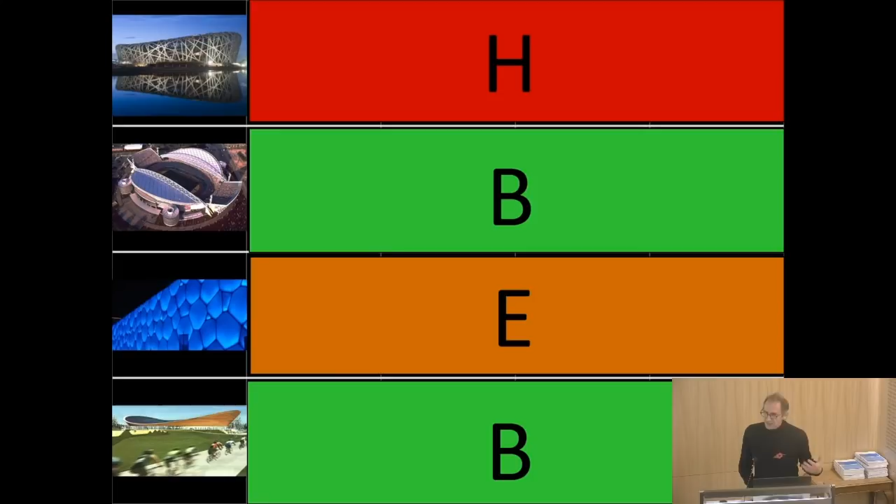So although everybody said that's fantastic, because it was about carbon, nobody really paid much attention. So I'm just going to put up a couple of hypotheses, and the first one is just for testing.

Engineers may need a bit of help in order to use resources wisely. We talk about carbon, but that clearly I haven't managed, over many years, to get embedded with the people we're working with on a common enough basis to be used in design. No one asked for it, as has been said in the survey. So something else we probably need help with.

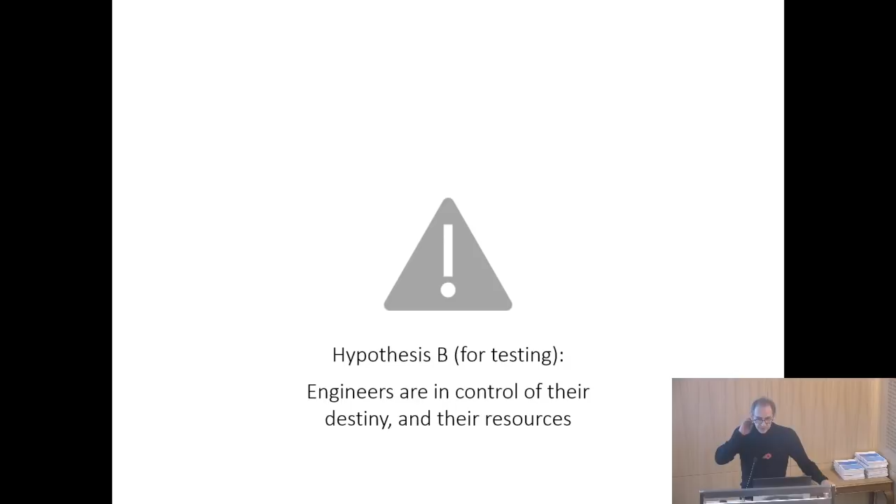There is a hypothesis which says engineers are actually in control of their destiny, and therefore in control of their resources. But I don't think, certainly from my own experience, and I'm not quite sure how people here feel about it, it's probably not true in practice. By and large, the other factors, and there are many of them in the MEICON survey, appear to take over.

So the reaction is, oh Jesus, it's not what we were hoping for. So a rhetorical question: does anybody important, by that I mean people who commission engineering projects, people for whom we're designing, actually care about carbon at all anymore?

I suspect, well, I don't know, a show of hands? Who thinks yes, people care about it? Who thinks no? Yeah, more people putting their hands up for no.

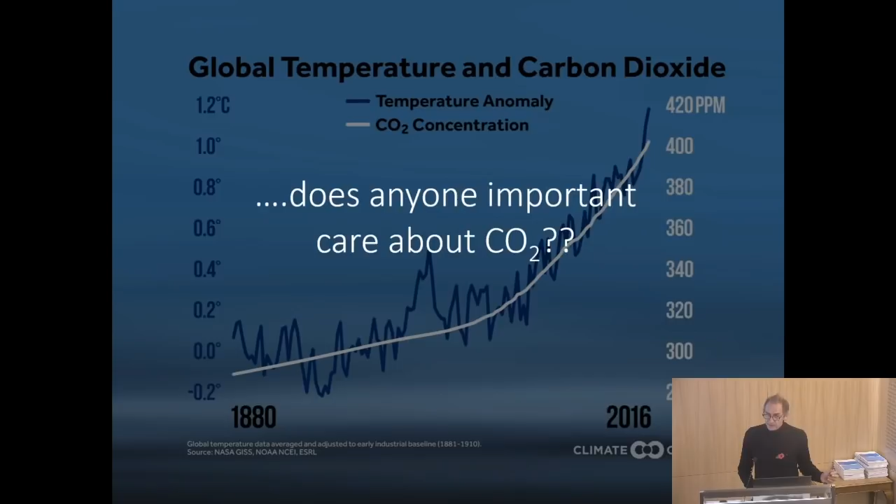I think in practice, people do care about it because they can see the climate change impact, but they don't know what to do about it. And certainly when it comes to one-off buildings, one-off commissions, one-off bridges, roads, God knows what construction, I've never heard a client ask for anything to do with carbon. Never.

So the other place where there is a lot of wastage is in people making mistakes. Ed McCann, my partner, and the Institution of Civil Engineers, the structures, and also a whole group of contractors, clients, and consultants have been working for the last couple of years. In fact, Bruce, I saw here, who helped put this together in the early stages, doing a lot of the research for it, looking at the sources of error in construction, because some of those have a direct effect on the amount of resources being used.

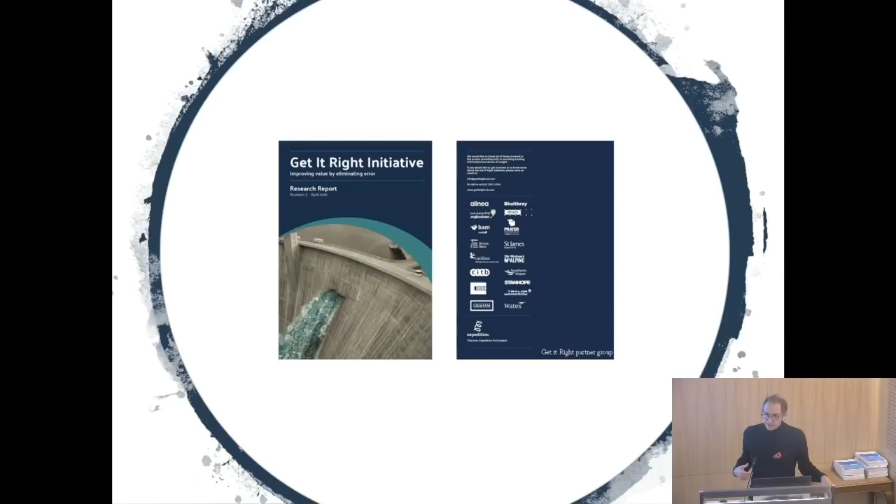So this was in 2016, two years ago. Ed and Tony Barton from Robert McAlpine, or ex-Robert McAlpine, have been leading that. And in round numbers, a quarter of the UK's construction budget is wasted. So this is not, you will have noticed, carbon anymore, this is money. It's converted to money because people seem to respond to that better.

Roughly a quarter, and it spreads around concrete, some in facades. The structural engineer has a part to play in quite a lot of that, and a bit like John's slides earlier, it's in the sort of 40% range, maybe more, depending on what you class as structure. But getting things wrong and the wastage that comes from that is significant.

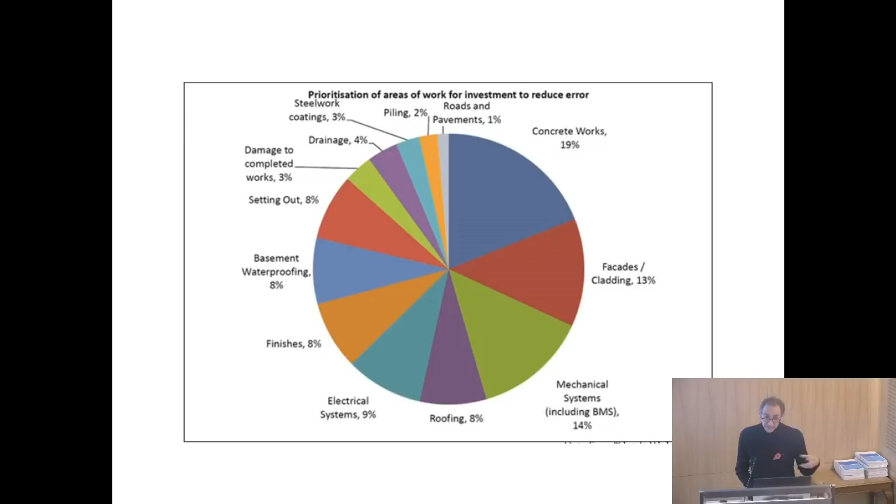So again, I think in total you're talking about something of the order of 20 billion, getting on for 20 billion out of getting on for 100 billion worth of construction every year in the UK is just chucked away. Badly done, has to be done again, all that sort of thing. And you think that's another source of carbon emissions.

And we put those two together in an attempt to persuade. We started with the National Infrastructure Commission, John Armitt, who was the chairman. We went to see him, and we put together Enough is Enough, and this is before MEICON started. Enough is Enough, and Get It Right.

I went to see him to say, the 2025 construction strategy has just been published by the government. You are responsible for influencing the commissioning of infrastructure projects. What are you going to do about it? And here's a bunch of possible ways you can do it, which will save, in money terms, something like between a quarter and a third of the total cost. And of course, there's a benefit in terms of carbon reduction, which you don't have to mention because they will go for the money. And he was interested, amazingly.

So then we went to see Robert Mair at the House of Lords. He was interested. We've seen Andrew Wolstenholme. We've seen a lot of industry heavyweights who are interested. And it's because it's been converted to money.

So I want to mention in this context as well a lady called Rowan Conway, who is the Director of Innovation at the RSA, at the Royal Society of Arts. And she's just published a report on how governments procure things. It's very good, and particularly with a social context. And if you say dealing with climate change and dealing with the sort of ethical use of resources is something which has a massive social impact and people want to do it, the RSA report is very good. It's called Move Fast and Fix Things, published in July this year. And Rowan's great. She's written this thing. And I'm going to pick out a few of the diagrams later on but this goes into the mix.

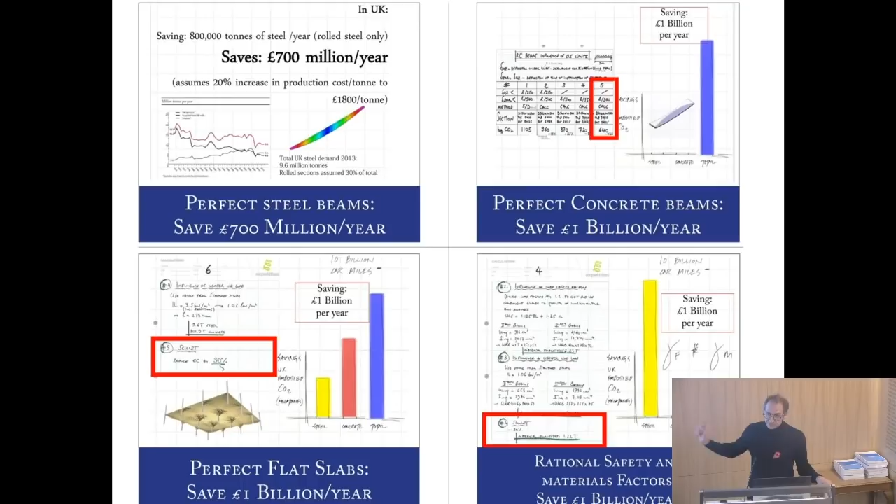So again, we converted the Enough is Enough stuff a year or two back to money, and the savings are significant. So if I said there were 18 billion savings from error, on top of that, from improving the efficiency of the stuff we design, and these are just 4 examples from the simple structures, you got roughly 1 billion for perfect steel beams, i.e. ones which follow the bending moment diagram and the shear force diagrams, perfect concrete beams, perfect flat slabs where you don't have loads and loads of concrete on the bottom just weighing everything down. You only put the concrete in the compression zone primarily. And rational safety and materials factors.

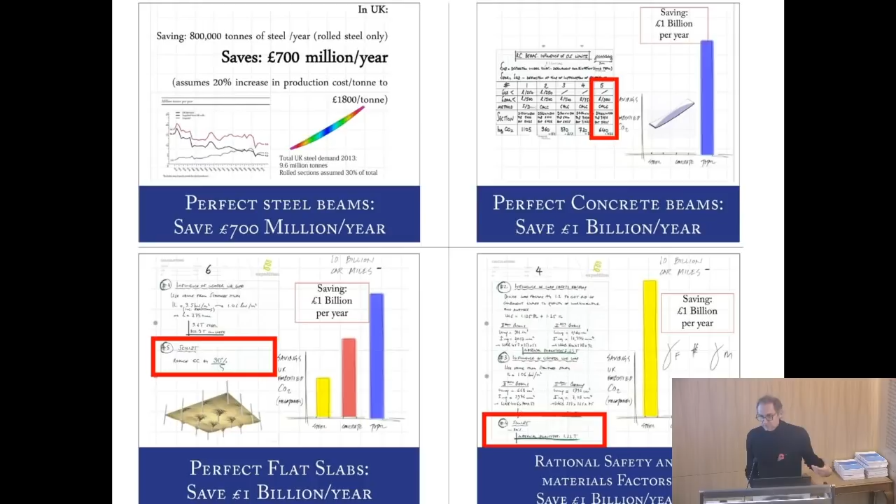I don't know if Clement's here. He's not here, who did a lot of this work. In fact, that's his handwriting. Who's one of our guys. You add them up, there's about 3.5 billion there. That's another 3 or 4% of the total UK. And if you then gross that up around Europe, around the States, China, emerging countries, you're talking about really significant numbers with lots of noughts on, like the great big number you had earlier.

The best magic idea, and I've said this so many times I'm getting bored with it, is that you take the codes of practice and write the words to do what you need to do and no more. Put those in the codes of practice. You don't have to change anything, just say don't do any more than you need to. That's it, three words. Every government contract should have those three words written in: please provide what we've asked you for and no more.

Don't go for 80% utilization, meaning 25% over design. Don't go for 3 kilonewtons a square meter when you know the loads are only going to be between 0.5 and 1 maximum, all that stuff.

But even if you were to comply with the codes and just go for a utilization factor of 1, you would take 20% or 25% out of the materials, by the admission of the people who responded to John's survey, who have all admitted we add a little bit in from time to time, don't we? Because we feel we probably should, since we're not quite sure what's going to happen. That's what the codes are designed to stop the need for, and yet we still all do it.

And if you gross that up around the planet, it's just colossal. It's material that's doing absolutely nothing apart from acting as ballast, weighing down things, chucking carbon into the air, and costing money.

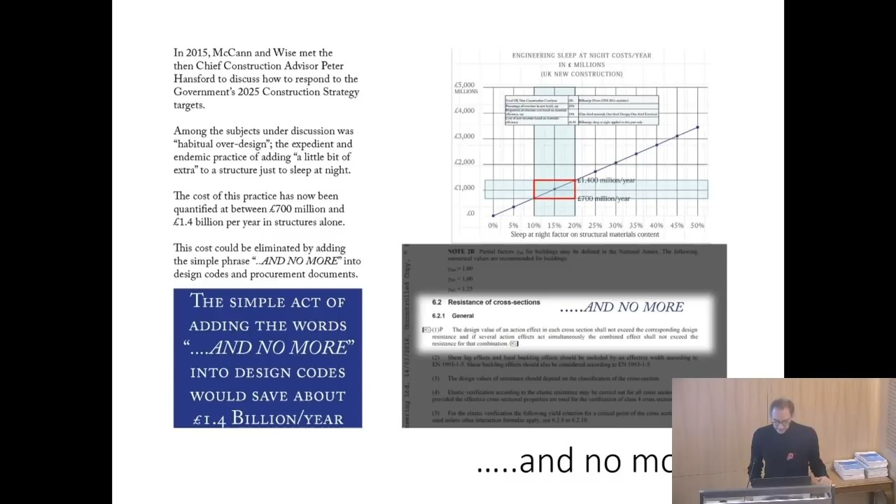So why is MEICON significant, which is really what I'm supposed to be talking about? The first thing is it's independent.

There have been an awful lot of... so 'Enough is Enough' was something done from within the industry. So anybody listening to that from outside the industry says, well, you're saying that because you're trying to influence us into giving you work, you're doing it for your own benefit. The fact that MEICON is independent is really important because it comes from outside the industry.

And therefore we can all quote it. We can say, it wasn't us that said this, Cambridge University and Bath University have done this piece of work. So that's really good. It's research-led and has a proper scientific research methodology, as you will have seen from John's stuff.

So the figures haven't been cheated or manipulated to get the answer, at least as far as I know, they haven't been manipulated to get the answer that John wanted. They come from a very high-status research body and Bath University.

Cambridge and Bath have a very high standing in the world of environmental engineering and materials science, which is significant in terms of influencing.

It can be funded. If you're a consultant or a contractor and you want to get research funding, it's very, very hard to get it funded. If you're a university, you can go straight to EPSRC and say please fund this project, which is exactly what they did here.

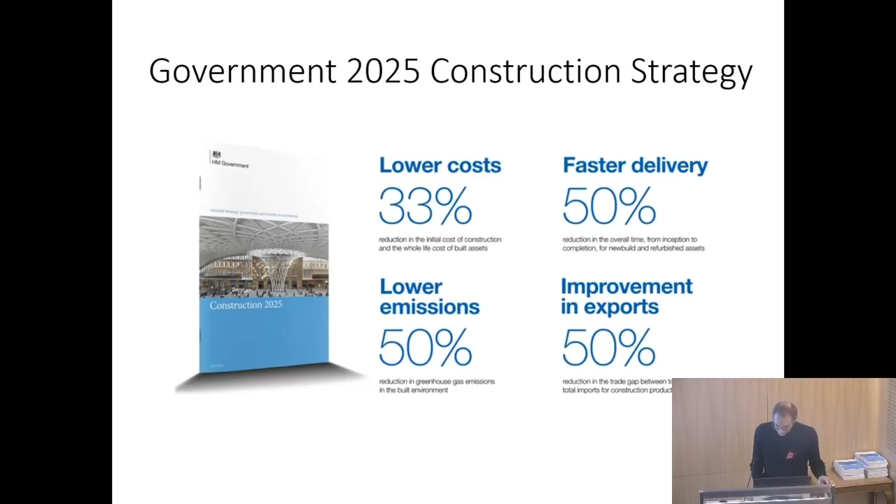We actually sat with Peter Hansford pretty much the day after the 2025 construction strategy was produced over a very nice lunch and said, well, okay, Peter, so that's what you've said the targets are. How do you think the government is going to help us get there? You know, are you going to invest in research? And he said, I've got no idea, absolutely no idea. That's down for industry to sort that out. So at that point, it's for us to sort it out. So they weren't even going to change the regulations. So these things are useful, but I'm not quite sure how useful.

What are the key contributors to inertia? So, in a funny way, the same things. If you can get planning permission and building regs approval doing what you're doing at the moment, you'll carry on doing it. If you still get government commissions on the basis of what you're doing at the moment, you'll carry on doing it. And I was going to put the 2025 construction strategy. If you can carry on doing it and just ignore that, you're going to carry on ignoring it.

And the one-way ratchet on codes is a big inertia, where the only way that you can tell whether your project is going to work in the long term is by looking back at all previous projects that have been built in that sort of sector and say, well, they were built to a code which had these numbers in it, so therefore, as long as we don't go below those numbers, we can use that as a calibration set for our new set of codes. That's why you can't go backwards with the loading. So then that says you need to have a different mindset as to how you're going to actually design things.

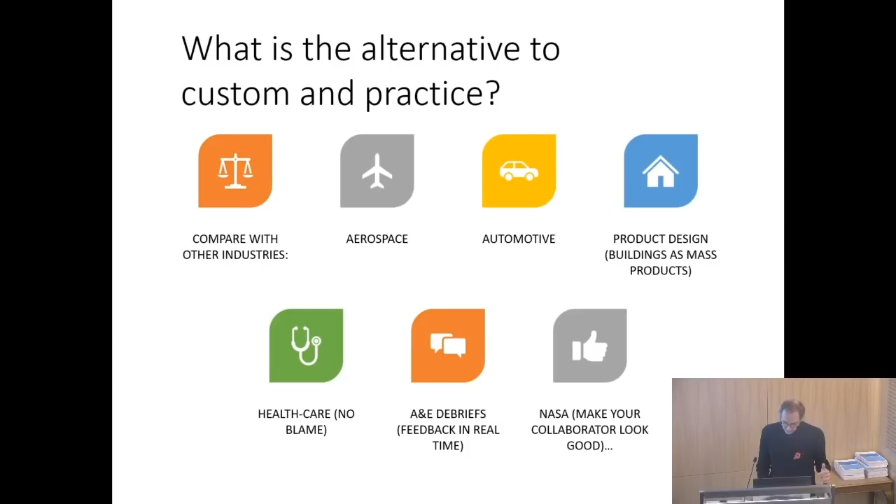Another thing that I think is important is to design for performance, not for code. Meaning, you do a proper risk assessment on the loads, on the materials capabilities, on your comfort doing the calculations, all the things that are enshrined in the code of practice, but you do it on a methodical basis and on a risk basis. We do risk assessments on all of our projects. So why aren't we doing the same thing on the codes and the methods we're using? We should be. Because some of the time we're over-designing because the code says so, but actually the risk of us getting it wrong is precisely zero. It's been done 1,000 times before. So I think a risk-based, performance-based design is really important.

And I've said here, we want an open source database. I take the point about the difficulty of data coming from different places, and I made a point a bit later. It's like VHS and Betamax, for people who are very old, who remember that. You need a unified source data format, which with BIM, with everybody using AutoCAD and Revit and all these sorts of things, should be possible, to get the data into a format that we can all use, at least going forward. You would imagine that would be possible.

If it is, then you can start to mine that data properly, knowing that it's been prepared in the same way. So the protocols, I think, that go into that, not on a one-off project basis, but on the basis that that data is going to go into a pool that everybody is going to dip into and learn from, I think is important. And it can be anonymized.

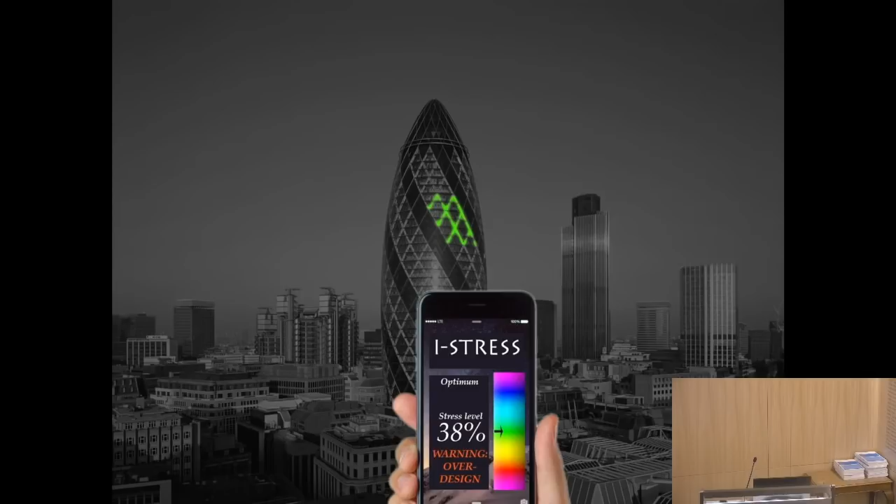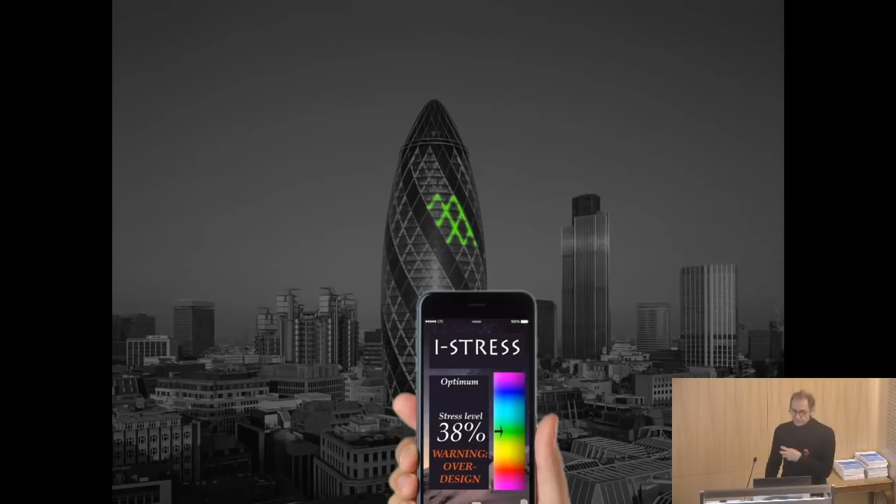If we use this app more often, it would be embarrassing to go around London and point at buildings and say they're all working at 38% of their capacity. People say, what's going on? Why have you got such huge things being built all over the place? Why are you using all that material when they're actually only working? Well, we can't do it at the moment, but we've got to move to the point where we have enough confidence in what we're doing to be able to demonstrate that to ourselves and to other people and be held to account for it. So last thing is, what could you do?

What could we do, actually? First one is, in the codes, they have special workmanship and materials fudges, for situations where the construction quality is special, or the quality of preparation of materials is special. So you can reduce concrete cover, you can reduce materials factors. There are all sorts of things depending on the material you're using. Most of the time, people don't use those. I bet the contractors in the room do, but the consultants don't.

We should be using them as a matter of course, because most manufacturing and construction nowadays goes into the category of special construction compared to when the codes were written. So I don't know why we're not doing that. That would take a few percent off. I think we should be designing with a utilization factor of 1.0000000, rather than a utilization factor of something else, as John was showing. Be smarter about serviceability, as I said.

Calibrate the completed buildings. It's obviously a longer play and a big research program is needed. But in the end, we're not going to move this forward if people don't know how hard or easily the buildings, bridges and roads are working. Use BIM with a standard format for input and output that can go into a data set that everybody can use. It's ridiculous to have different outputs which are not compatible with each other, which then need to be open sourced. And I would say you only get planning permission if you agree to put your data into the common data pool.